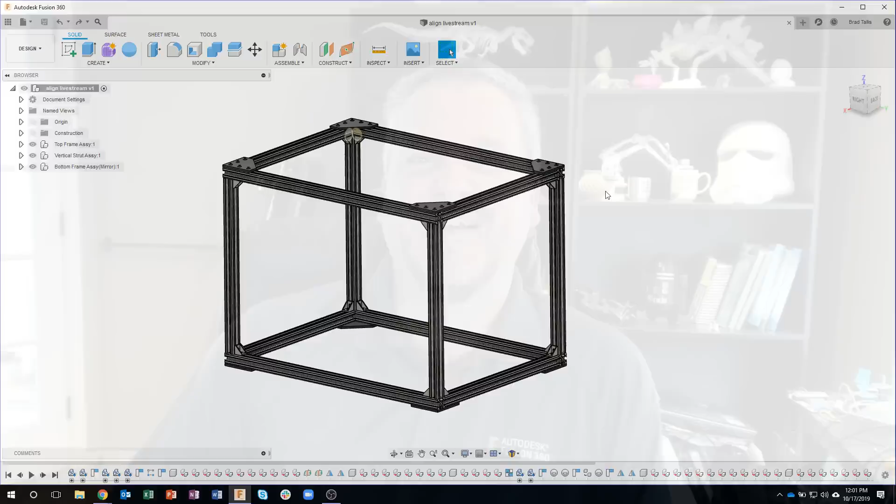Good news, my buddy Aaron is officially back. He's been gone about six weeks, so Aaron is on the keyboard today. Everybody make sure you say hi to him, we've missed him. He was on sabbatical and moved to Toronto, Canada, so we're going to miss him in San Francisco, but he's making a new home in Toronto. Thanks for helping out, Aaron.

I can see in the chat everybody's excited. Yeah, we've missed him, I'll be honest.

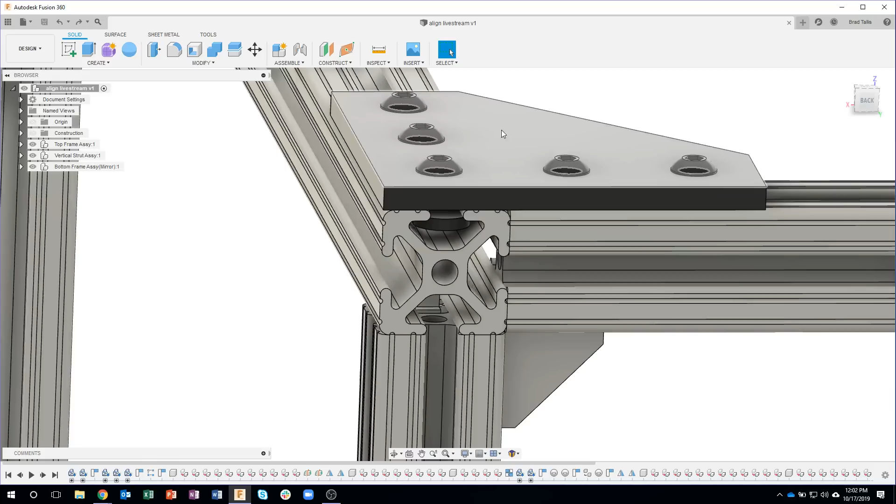What I'm going to talk about today is positioning parts in place without having to create a ton of joints. I'm going to zoom up on this corner, and you'll see we're going to learn about bringing in some 80-20 extrusions, some mounting plates. You'll notice I even have some screws in here with their specialty T-nuts that slide in. Believe it or not, there's not a single joint in this assembly, and you'll see that as we go through. So I'm going to go ahead and start a new design.

You might ask, why not use joints? Well, when we're mocking something together like this, I don't want to have to worry about specifying and capturing all those positions. I just want to mock up the design, and since this is a rigid structure with no movement going on, I really don't need all the different joint types, like revolute and slider.

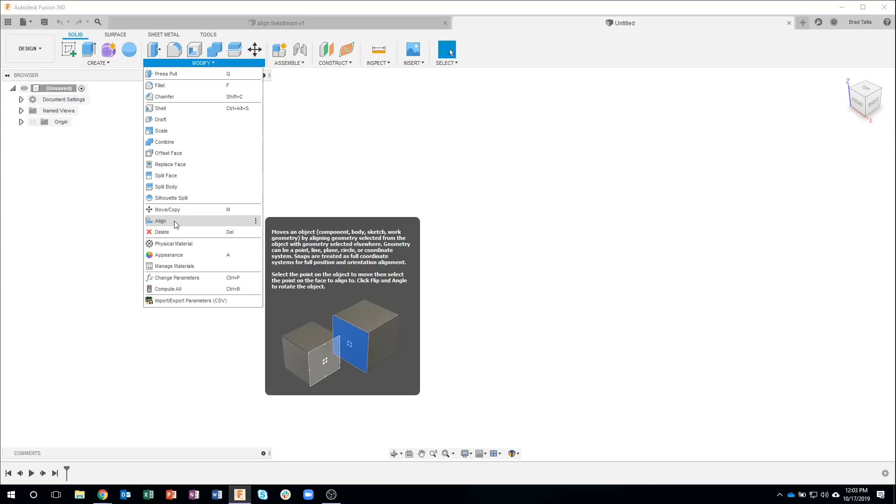So we're going to learn a new command under the Modify menu called Align, and I'm going to show the functionality of this.

We're also going to learn a couple other tricks, and a shout out to Peter. He made a funny comment on the Fusion 360 webpage saying he loves learning all these new tricks, so I appreciate that. I'm glad everybody's learning something.

I've shown this in the past where you can insert a McMaster-Carr component, but there's also another really powerful option in here called Insert a Manufacturer Part.

When I do this, it's going to bring up a web page, of course, on the wrong screen, so let me bring this over. Just a second here. Okay, I want to get back so I can see what everybody's seeing.

This brings in a manufacturer part, and you'll notice it's got a bunch of different manufacturers in here. For example, at the very top we've got 80-20. You'll see ABB in here, and you'll probably recognize some others, such as Bimba cylinders. There's a lot of electronic parts too, like Eaton has a bunch of stuff in here. Maybe you need IGUS chains, so you can click on the I over here, and here's all the different IGUS products. I'm going to show how you can insert this type of stuff right into Fusion.

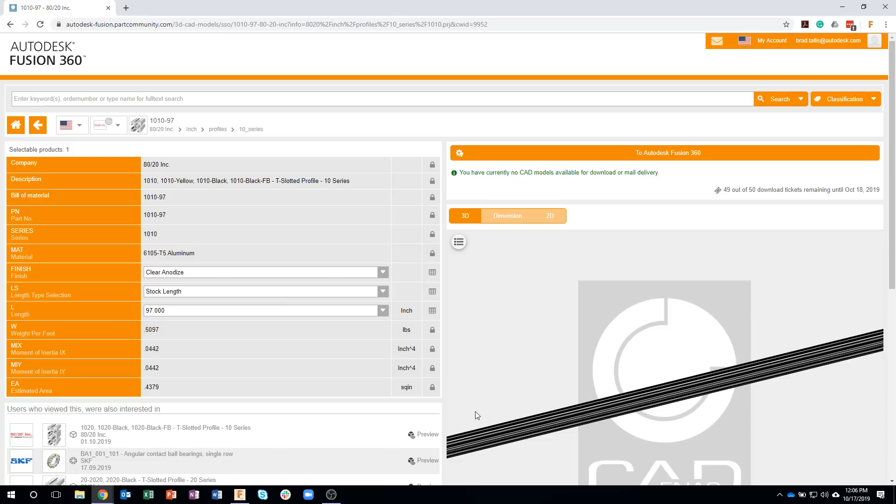And it gives you options, and it even brings up a 3D viewer. If I rotate it, you can see the end profile. This is a really long example, so that's why it looks so long, but you can see that's a 3D model of that 80/20 extrusion.

So you can verify that it's correct. It gives us all the information about it, and you'll notice it says stock length, which is 97. Well, I can come in here and say I want to do a custom length, and I can either drag or type it in. So for example, let's just do a custom length of 24.

Now you'll notice it says you've changed something. If you want to update your preview, you can, and it'll update that 3D preview, but you'll notice it'll be much shorter, a better representation of the actual part. So I really like this built-in 3D preview, so I can verify that looks pretty good.

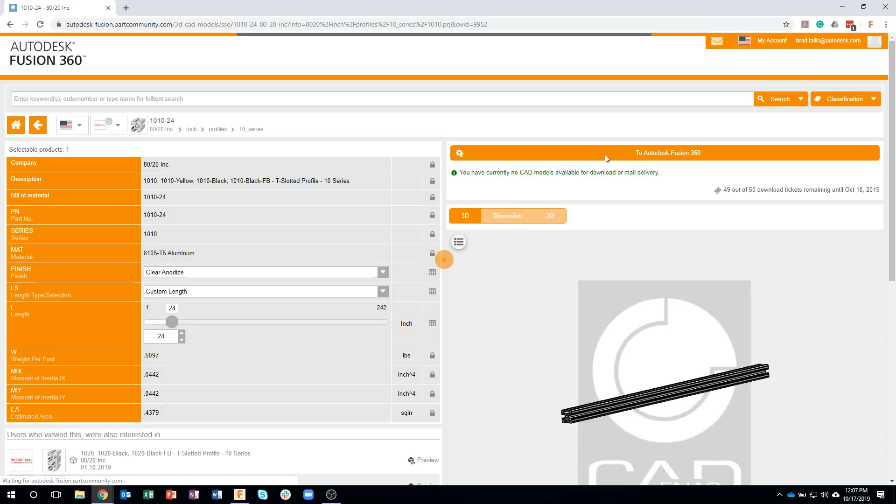Then you'll notice right here, to Autodesk Fusion 360. So I just click on that button, and it's going to bring up this dialog that says open this application. Go ahead and say open. And let's confirm that that's going to work. It's because I have these multiple screens. Yeah, there it goes, I'm going to have to bring up Fusion.

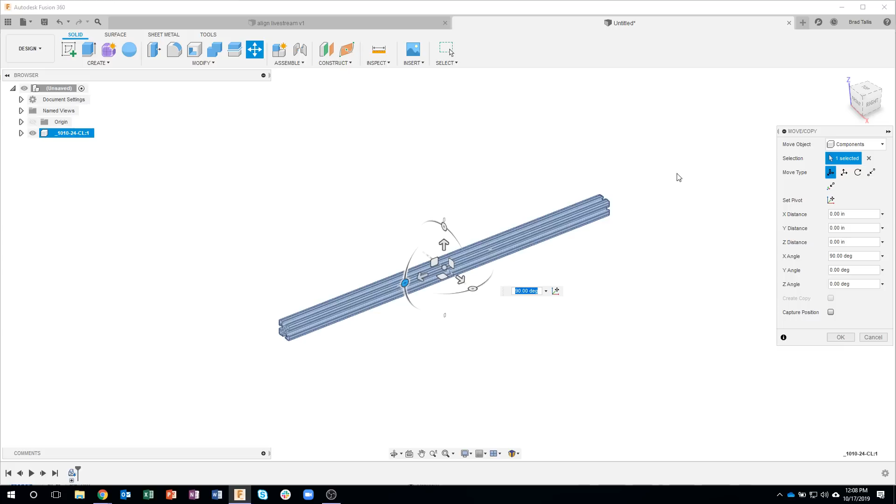And here you can see there is that 3D model from 80/20. Now it's pointing up and down. I want it to lay horizontal, so I'm just going to grab this little button and drag that down until I see 90 degrees. So now it's laying flat in the top orientation, which is what I want. And I'll say okay. Okay, so that's how simple it is.

I did not have to draw the profile and extrude or anything like that, and this is just like any other Fusion file. So for example, I could click on this face, say press pull, and I could move and change the length of this part if I needed to. So by default, I brought in a 24-inch part, but I could come in and make changes to it, just like it was created inside of Fusion.

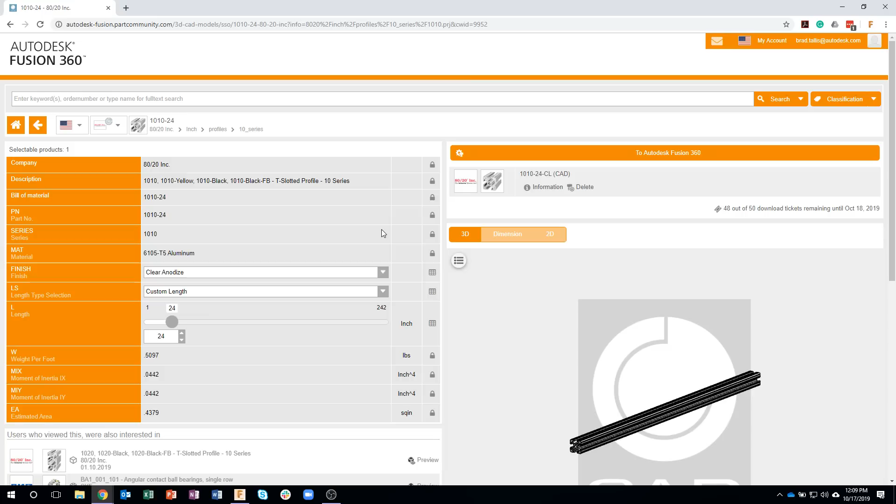Okay, so I'm going to do this a couple times to bring in some other parts. Let me jump back to that page. And now I want a custom length. Let's just do a custom length of 16 in this case. I'll say to Autodesk Fusion 360. Click on that open launcher, and I'll just jump over to Fusion, and you'll see it come into Fusion and add it into our current design.

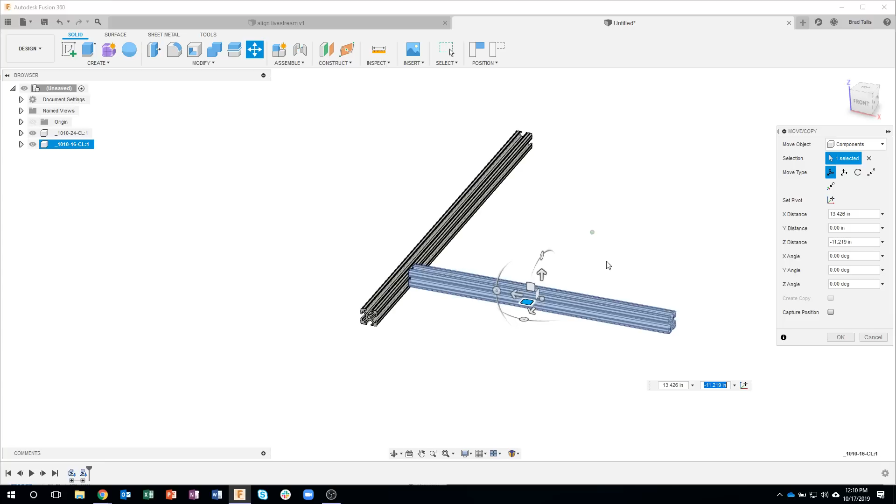So there it is. Okay, so I'm going to go ahead and rotate this a little bit, and I'm going to rotate it this direction. And maybe I'm just going to get it close to where it needs to go. Okay, so you can kind of see it's sort of floating in space right now, and I'm going to leave it where it is. I'm just going to go ahead and say OK.

And notice my browser, I'm going to make this a little bit smaller. So here's the two different parts, there's the 24-inch part and there's the 16-inch part. In fact, I'm going to move the 24-inch part over just a little bit so it's not in the default location, because that's going to make things more observable in the near future. Otherwise things would come in perfectly, and I want to show that it doesn't come in perfectly every single time, and we might need to reposition or whatever. Okay, so I've got my two parts.

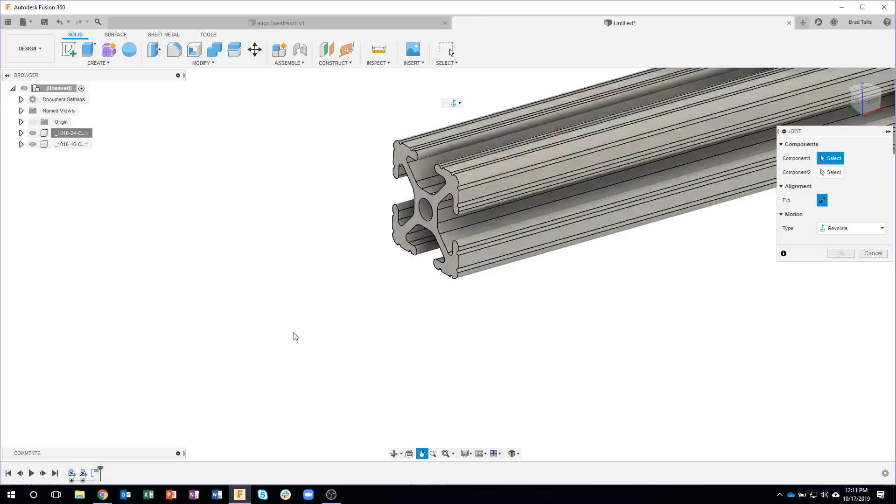Now I want to line these up, and you might say okay, we'll go ahead and use the joint command. So I'm going to say joint. Now when you do a joint command, you get all these little markers to line things up. Well, for example, I don't have a sharp corner right here, so I really can't go corner to corner. In fact, if I zoom out, you'll see over here, there's not a corner to go to. And so creating a joint isn't always the best solution.

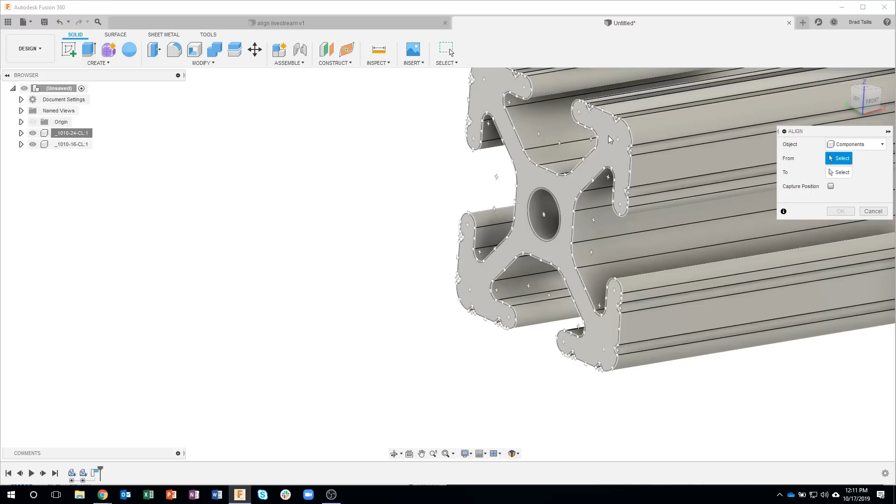So what we're going to do instead is use the align command. So I'm going to click on align, and you'll notice it allows us to align components from and to. So what I like to do is get it lined up in 3 different axes. For example, I'm just going to click on this face - I could click on these little markers, it really doesn't matter - but I'm clicking on that face because I want to align it with a face over here. So this face, I want it to butt up against this face.

So watch what happens when I click. You'll see that part slide over. And if we look at it from the side, or from the front, you'll notice that those are now lined up. So it aligned that face with this face down here.

Now I'm still in my align command, and this is what I think is so cool. I don't have to do 3 separate align commands. I'm just still in the align command.

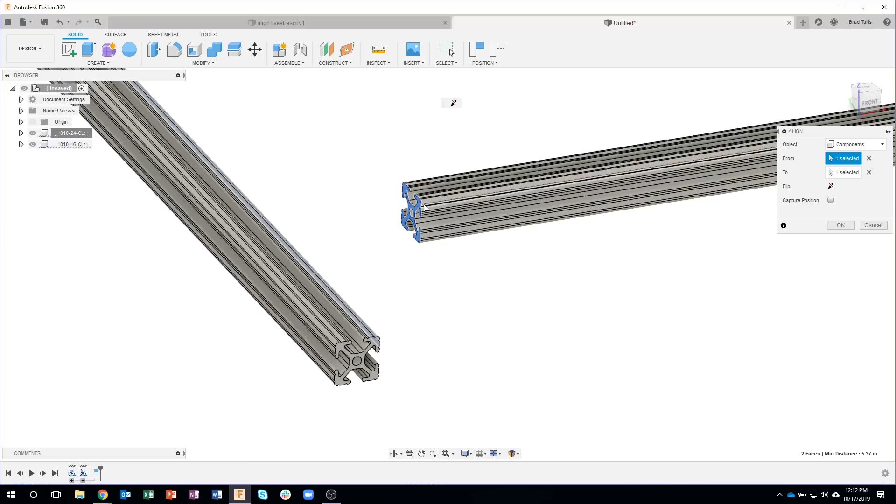Maybe I'll say I want that face to align with this face right here, and you'll see it snap down. So sure enough, if we look at it from the front, we can see that we're aligned against that face and we're aligned against the top.

And so really the last thing we need to do is say, okay, let's align that face with this face over here. And you can see how it slides that part into the correct location.

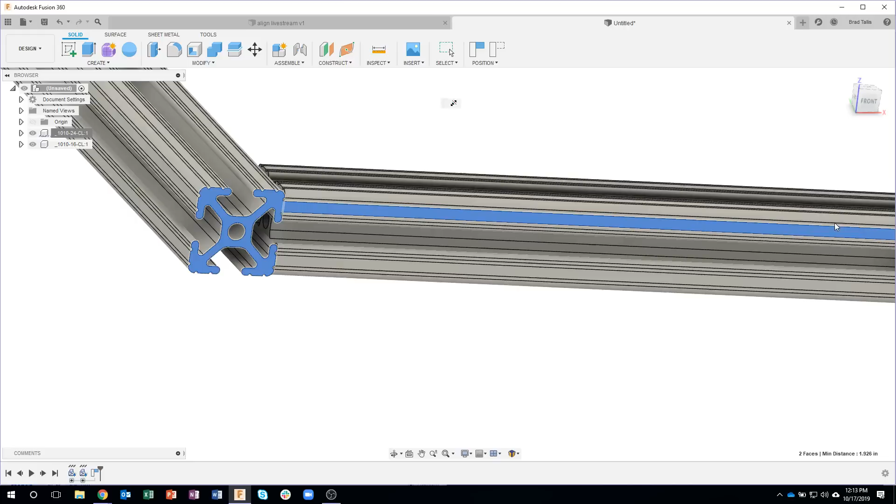And I'll go ahead and say okay. And there it is. Now you can really visually see that sure enough we weren't able to line up any corners or anything like that with a joint command. It would have been pretty difficult. I mean, it's doable, but I really like the align command. I think it's so much faster.

Okay, so now I got these 2 parts where they need to be, but I want to join them together. So let's go back out to that page. And I'm just going to back up a couple steps.

And I'm going to go into the joining plates. So I'll click on joining plates. And you can see all of the different manufacturer joining plates. I can't emphasize how cool this page is. I mean, I use McMaster-Carr all the time, but this is so powerful with all of the different manufacturers out there. Okay, so it looks like this guy right here.

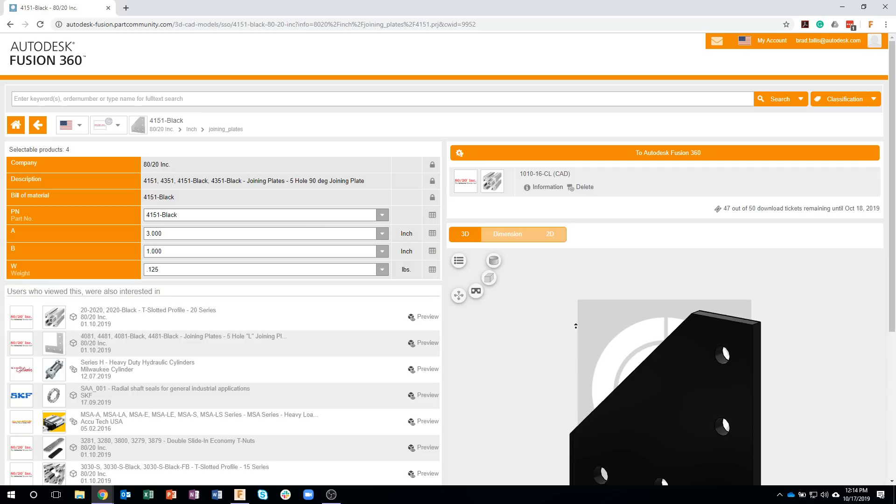I'll use this one. Gives me, again, some options, tells me what the dimensions are, gives me a preview what that's going to look like in my browser here and all that kind of stuff. Looks good. Even tells me what other people that were interested in this part.

It's kind of cool. I'll say to Autodesk Fusion 360. Again, I could have sketched this, I could have drawn it, but that would have taken quite some time. So why not just bring in the manufacturer's part?

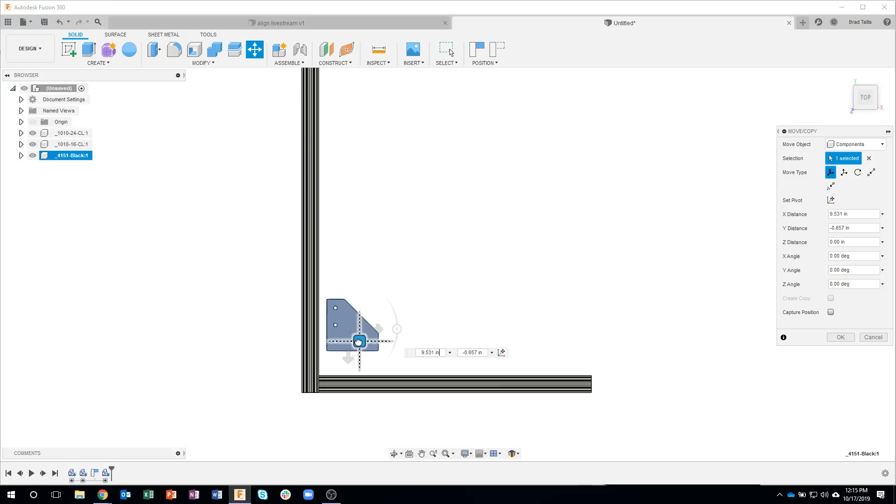Now it's pointing the wrong direction, so I'm going to go ahead and rotate. Let's just go 90 degrees that way. And I like to get it fairly close. So I usually look down at the top view, kind of position it where it sort of needs to be, and then I'll kind of zoom or rotate, kind of to the front view and just bring it down. Oops, a little bit too far. Something like that. I'll go ahead and say okay.

And now it's kind of floating out in space, but it's fairly close where it needs to go. Okay, so let's use the align command. So I'll say align from. I like to get it where it needs to go first. So let's just say maybe that face is going to sit on that face there.

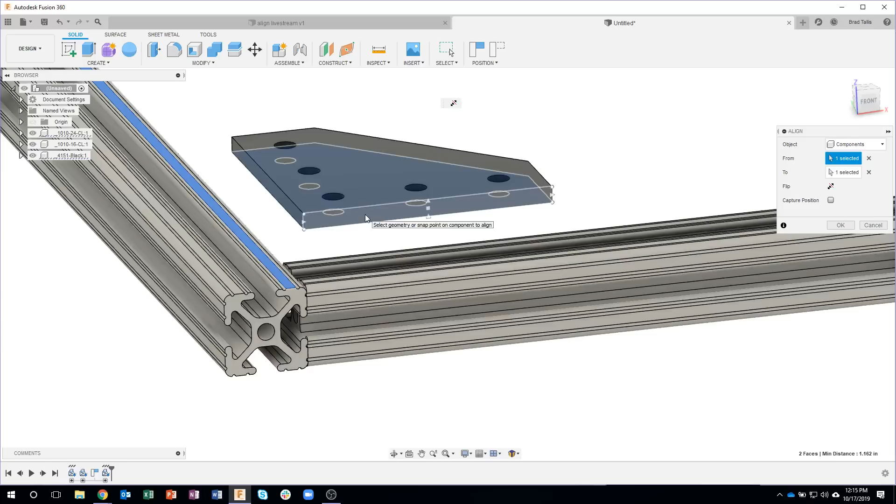You see it kind of slide down a little bit. Then I could say that face and that face there, and you see it slide toward me. And then finally, that face and this face over here. And it slides into place.

Notice I'm not having to grab any of these tick marks or anything like that. I'm just basically grabbing faces. I'm saying align that face there with this face here, for example. It's very, very quick. I'll say okay, and it's now in the correct position.

Hopefully this is making sense. It looks like Aaron is actively answering questions.

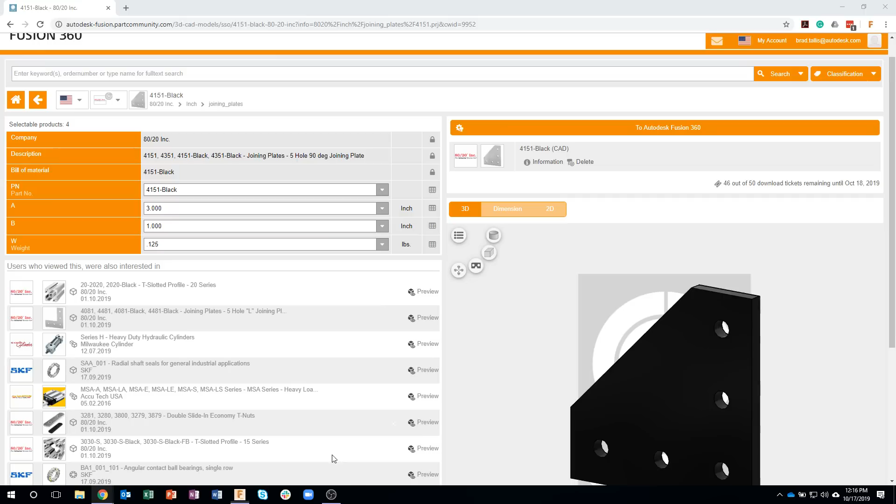So, okay, now let's bring in some hardware. Again, don't need to draw it. Let's just go out here. I'll back up a couple steps and say fastening options.

Sometimes you can do a search, and I think it's 3042. Let me just do a quick search for that. It's from my notes when I was doing this earlier. So if you know, you can see all the different product numbers, and sure enough, there's 3042. It's this socket head cap screw. I'm sorry, not a socket head cap screw, but just kind of a button head cap screw, it looks like. So I can rotate it around, see what that looks like.

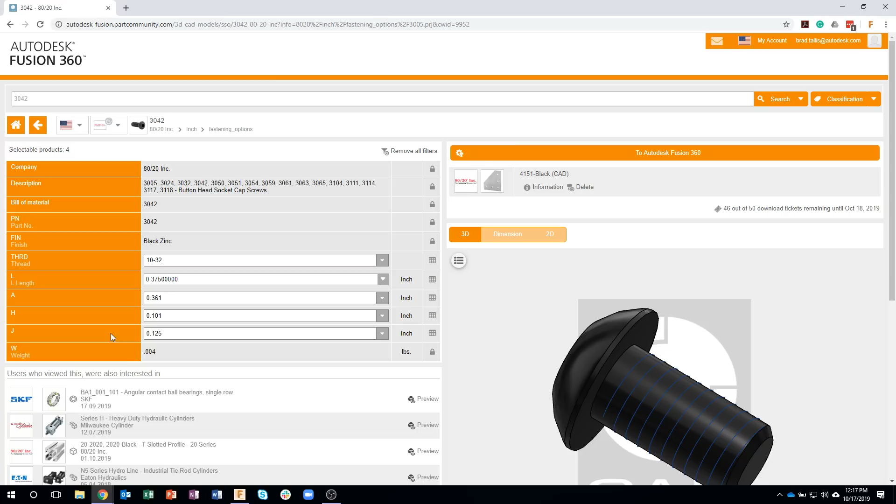I can specify the different threads in here if I need to. It's really cool, the different lengths. I'm just going to use the default one and say to Fusion 360.

It'll switch over to Fusion.

I like to get it sort of close, so I go from the top. I'll just kind of drag that over and bring this down a little bit. The only reason I do that is because I can zoom up on this area and see that, sure enough, the screw is pointing in the wrong direction. So I like to get it oriented first.

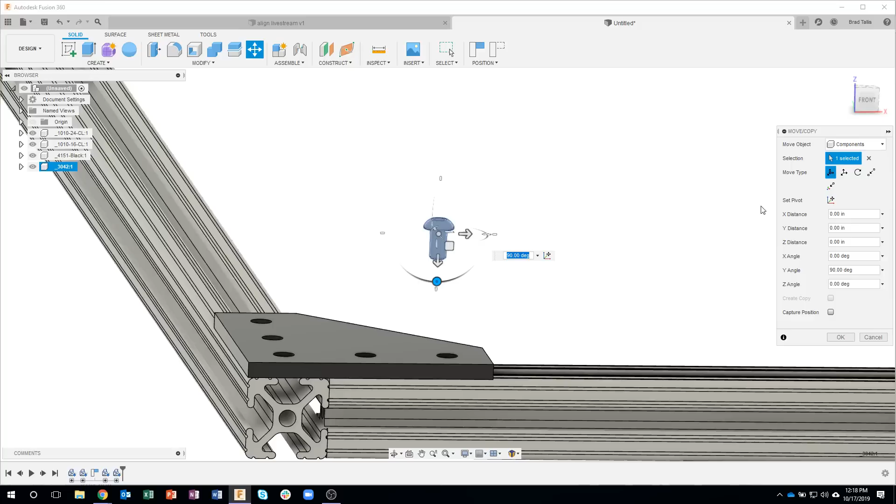So I'll say 90 degrees. Now I could use the align command, but you'll notice I'm in this move command right now. It's allowing me to move it around, and by default it's allowing me to do a free move where I can just kind of move it around.

But there's one in here called point to point. So I'm going to say point to point, and let's look at the bottom of the head here. You can see I can grab this edge, and it's a little hard to see, but there's a point right in the middle, right there. So if I just click on this edge, it's going to grab that point. Oops, that's my origin point.

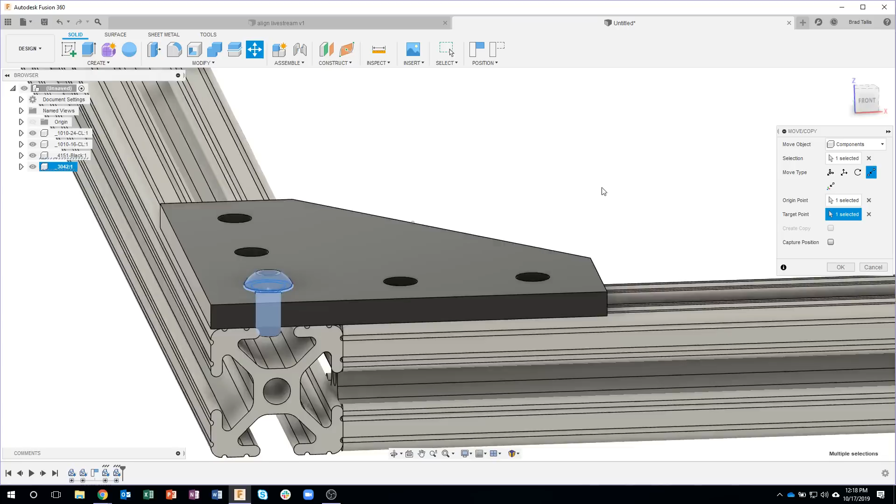And then the same thing over here. I'm just going to get near this circle and click, and it's going to move that screw from where it was to that new location. And because I picked this bottom edge of the screw head, it lined it up with the surface of the plate, and it's perfectly lined up in the circle. Let me go ahead and say okay. So it's kind of like a free move that we got. Didn't cost us anything.

Now, I think I see some people asking questions about, is align just like doing joints and stuff? No. In fact, if I grab this plate or this screw, I can move them out of location. There is no constraints or joints or anything like that being created as we're doing this. That's an excellent question. Oops.

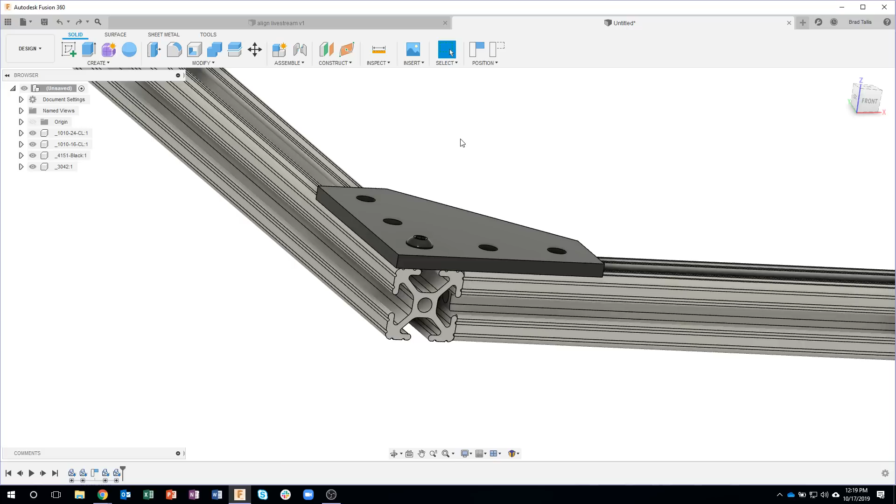Let me undo back. So it's just basically getting them in the correct location, but there is nothing defining that these are constrained or jointed together. But we're going to get to that here in just a moment. We're going to learn some tips and tricks with that also.

Okay, so we can kind of see that sure enough that's coming down through, and maybe I want to create a drawing of this or an exploded view later, so I want to actually show how this thing is going to get assembled. So I'm going to bring in one of their special T-nuts, I guess they're called.

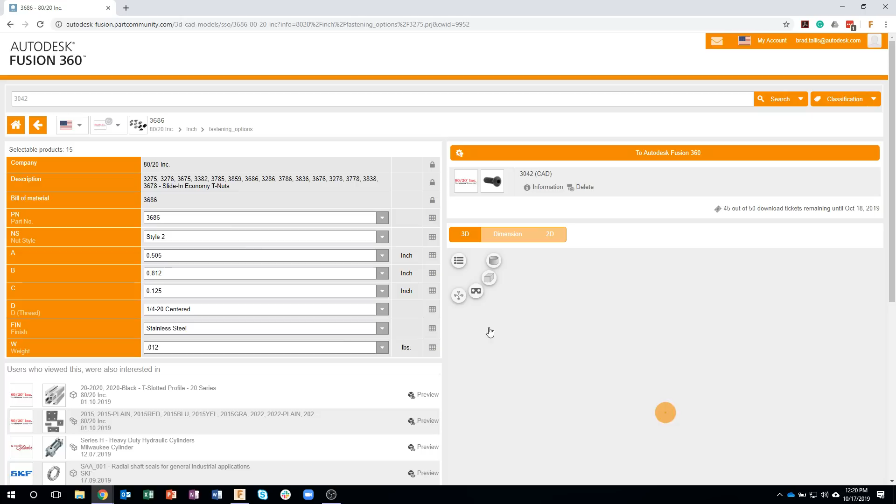So let me back up a little bit, and I'll go to the fastener. Let's do this guy, and you'll see the different kinds that they have. So it basically looks like a special nut that can slide through.

Now I do know that the thread that I brought in was a 10-32, so I'm going to come in here and change this to 10-32, and it'll update, give me the correct part number, etc. I'll say that's good. Let's go to Fusion.

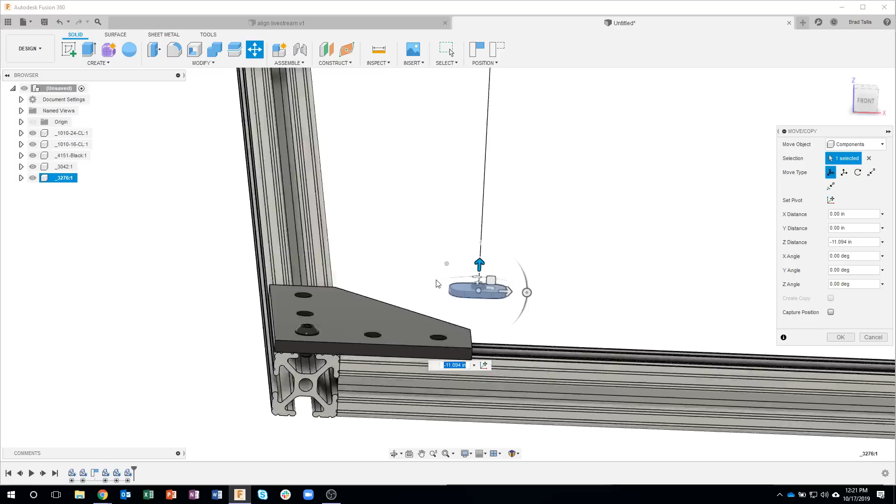Well, I know I kind of need to rotate it. Let's just go 90 degrees in that direction. And once again, I'll use the, actually I won't use the point to point, because we're going to see an issue that we're going to run into here if I were to use point to point.

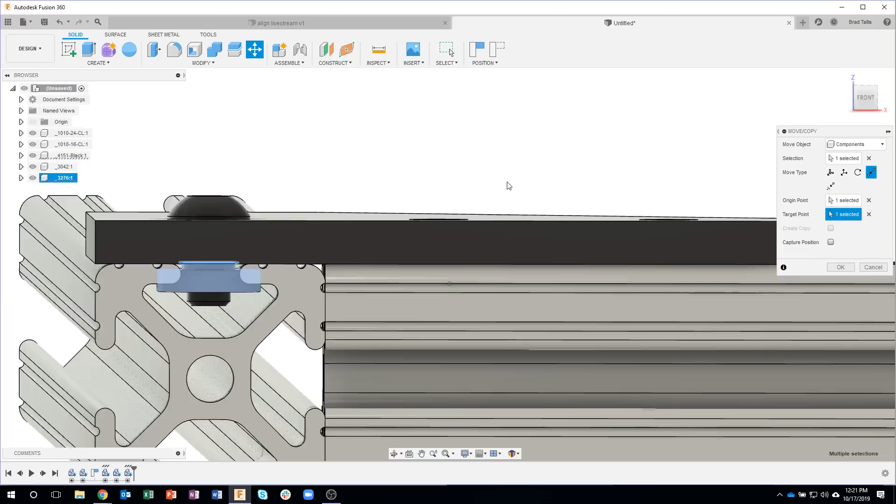So in fact, I'll show you, I'll make a mistake here. So I'll say point to point. I'll grab that top edge, but then I need to select a circular edge here. And if I were to grab that edge there, you're going to see that it's going to sink my washer into our extrusion, which obviously we don't want to do.

Okay, so I'm just going to go ahead and leave it right where it is, and we'll use the align command to help us out. Because remember, with the align command, I can do multiple aligns. So let's do align, and I'm going to do the exact same thing.

I'm going to select that top edge right there, and I'll select that top edge right there. And you can see that it aligned it where it needed to go. But let's go ahead and turn off that plate.

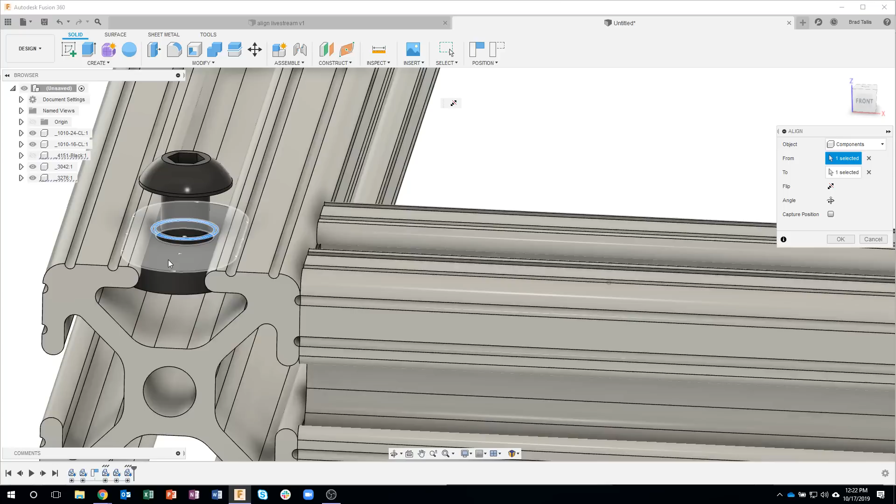Now I'm going to align that face with this face, and you'll see it drop down. We're perfectly lined up axially through the center of the screw, and now it's touching the extrusion where it needs to be. So I'll go ahead and say OK.

So again, you can see that's why I really like this align command. Okay, well, what about these other holes? Well, let's let Fusion do the hard work. Okay, I'm going to create a pattern.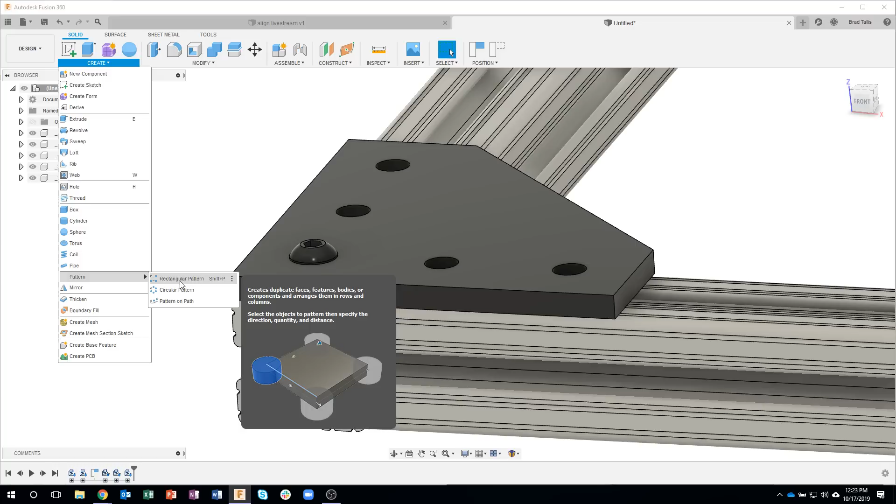Now, I could do a pattern on a path, but in this case I'm actually going to do a rectangular pattern because it's kind of a rectangular part. So I'm going to say rectangular pattern.

Now, every once in a while, you'll get these warnings that say some components have been moved. Do you want to capture the current position, or continue in the previous? Well, I kind of like where it is right now, so I'm going to capture the current position. It'll tag in my timeline that the screw and washer were positioned where they need to be.

Okay, so now I'm in my pattern command. What are the objects? I want to make sure I'm patterning components, not default faces, because everything we're doing right now are components. So now I can say I want to pattern the screw and the nut at the same time.

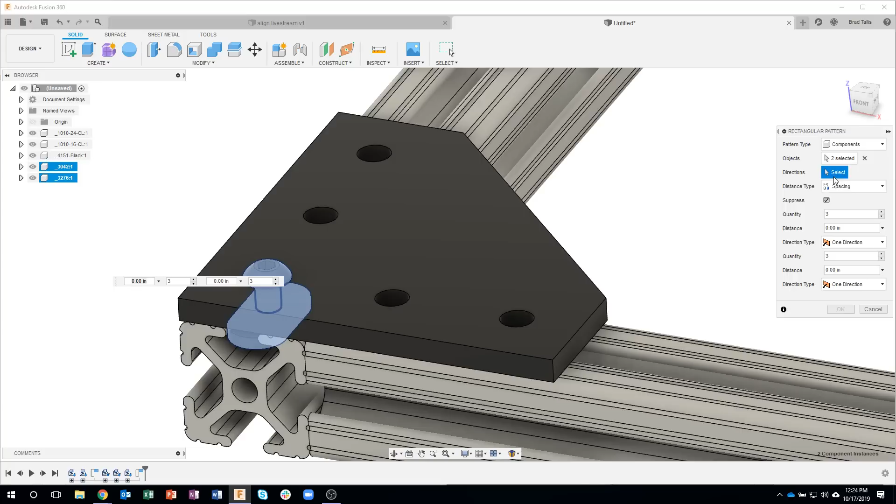Okay, what's the direction? Let's just go ahead and click a linear direction. And when I start to drag, we can see a preview, and I'll move even further so you can see what's going on there.

We have a distance of spacing or extent. Well, I know the spacing of these holes is 1 inch, just because I've done this before, but I could have measured between those holes. To save time, it's 1 inch. And sure enough, you can see it positioned those where they need to be.

Well, I also want to pattern in this direction, but notice I'm getting way too many—that's okay, we'll fix that in just a moment. So I know this distance for the spacing is 1 inch also.

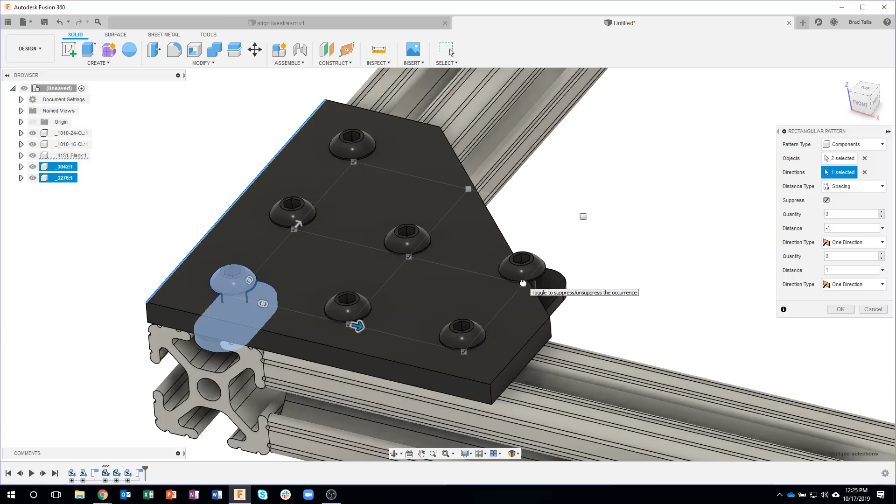Then notice this little suppress checkbox. What that means is every single one of these instances has a checkbox, and I can just click on them and turn off the instances I don't need. So I'm going to click those 4 that I don't need, say OK, and I've just created a rectangular pattern. We can see it did the screws and the nuts.

However, if we look over here, we can see that the nut is pointing in the wrong direction. So we need to rotate that around. Okay, easy fix.

Now here's a neat little tip. If you just hover over something in your timeline, you can see how it highlights it in your browser. So I can see that 3276 and 3276 are the 2 nuts that I need to rotate.

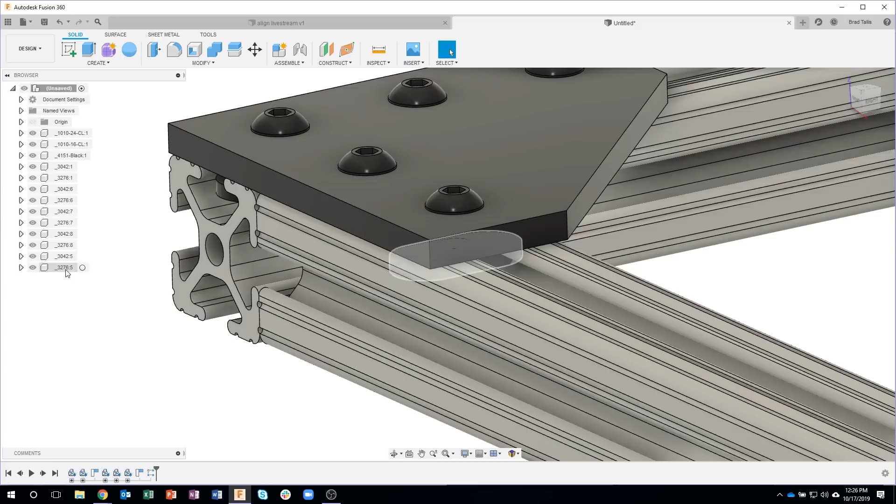So I'm going to click on it and say move. My origin is right in the center of that, so I don't even have to do anything except grab this guy and rotate it 90 degrees. And boom, we're done with that guy.

And then the same thing with this one. Right click, say move, and we'll rotate. Oops, make sure I grab the right thing there—sorry, I'll do that again. I'll right click and say move, rotate 90 degrees, and say OK.

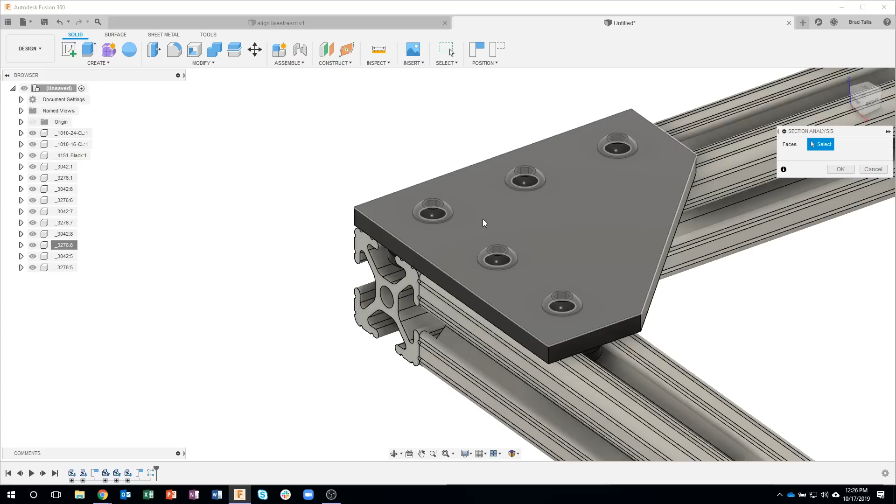And if I were to do a section analysis now and slice through this, we can verify that the nuts are pointing in the correct direction, and everything's centered and everything looks really, really cool.

Okay, now that was with me talking. Think about how fast we've created basically this corner of our enclosure here. We've got the mounting plate, we've got the screws, we've got the nuts in location and everything.

Now, obviously I want to reuse this whole assembly, but I don't have it as an assembly right now. These are all individual components in my timeline. So what I'm going to do now is start organizing.

So I'm going to create a new component, and I think the easiest way to do that is right click at the top level, and you can see it says new component. That's exactly the same as coming up to the assemble menu and saying new component. But I'm going to say new component, and you'll see, sure enough, there it is.

And I can rename it—I highly recommend you rename your parts and components because it makes things easier to find and deal with later. So I want to create a sub-assembly of this corner plate.

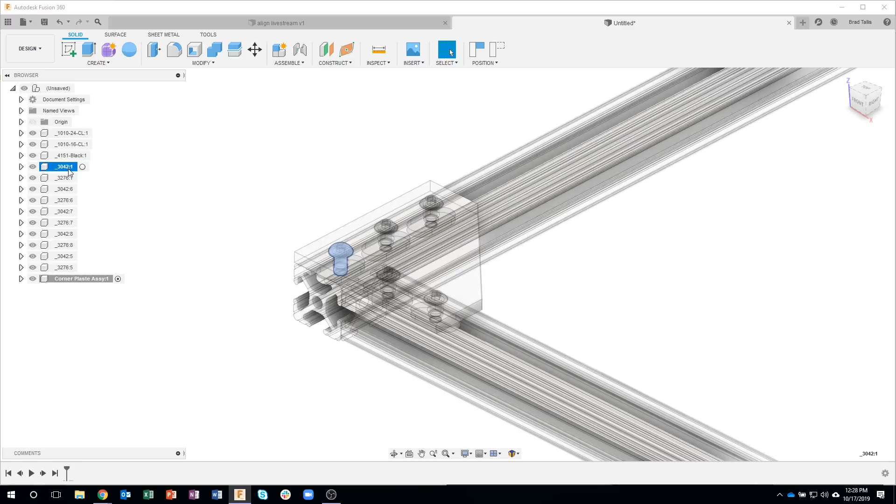So I'm going to just call this corner plate assembly. And then I'm just going to grab all of the parts that have to do with this corner plate assembly—there's the big black part there and all of the screws and nuts. So I'll highlight all of those and drag and drop it onto my corner plate assembly.

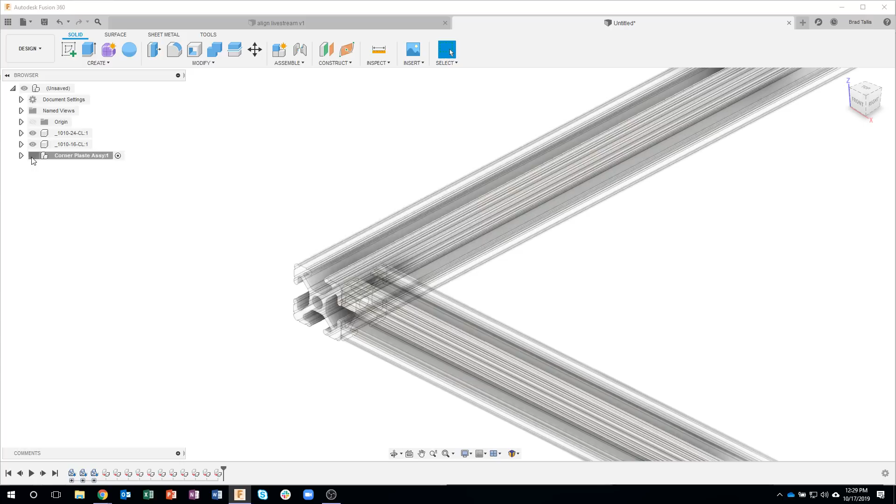Now, like I said, you might see this pop up. I'm going to go ahead and capture the position, but notice what happened—it put all of those components underneath this corner plate assembly. And if I toggle the visibility on or off, we can see that that's almost like a sub-assembly. It makes it really easy to kind of figure things out.

Okay, let me go ahead and activate my top level again. Now I want to start mirroring some things around since I don't want to have to keep reinserting—I already got what I want. So I want to mirror this onto the other side over here. Well, to do a mirror, we need to have a plane or an edge or something that we can mirror along, and I don't have that here.

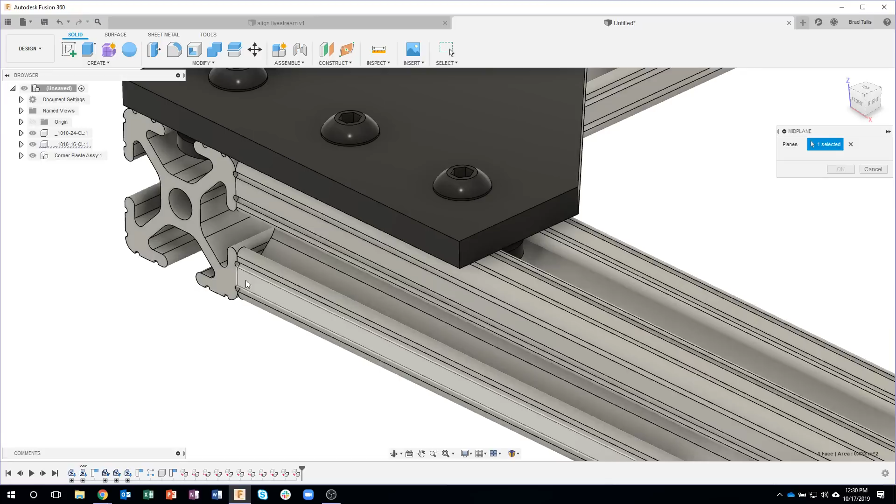So I'm going to create a construction plane. One of my favorites is this mid-plane construction plane, so I'll go ahead and select that. And I'll come over here and grab that face there. Then, depending on where you move, you can kind of see how it's highlighting that face—I'll go ahead and click that face there. And what it did is it basically sliced it in half, and it put this plane exactly in the middle of those two faces.

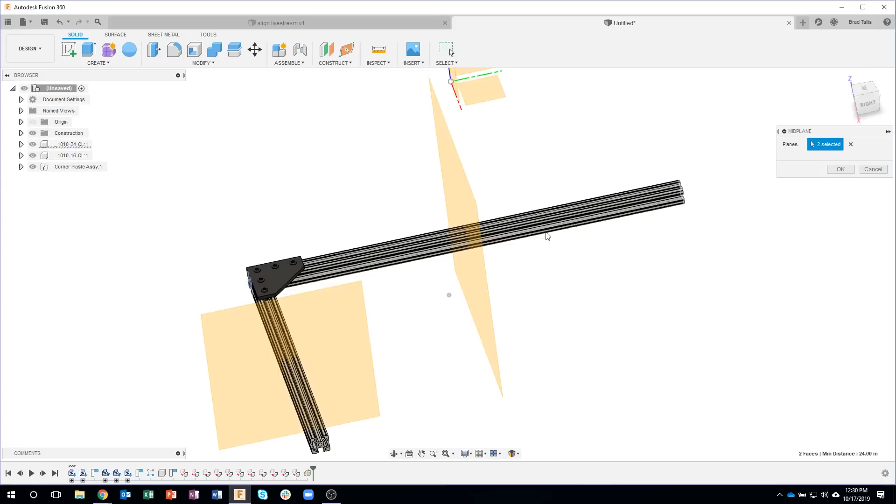And I'll do the exact same thing because I'm probably going to mirror in the length direction also, so I'll do a mid plane. Let's just grab this end face like so, and I'll rotate so we can kind of see, and grab that face there. I now have a construction plane that slices right through the center of that long arm. Okay, I hope this is all making sense.

Okay, so now that I have what I want with these construction planes, let's start using the mirror command. I'll come in here and say create mirror—again, I want to make sure that components is selected, because sometimes by default faces is selected. So just verify that we want to mirror some components. And I want to select the corner plate and this arm right here. What's my mirror plane? It's going to be this plane right here. And you can see how that brings that across. I'll go ahead and say OK.

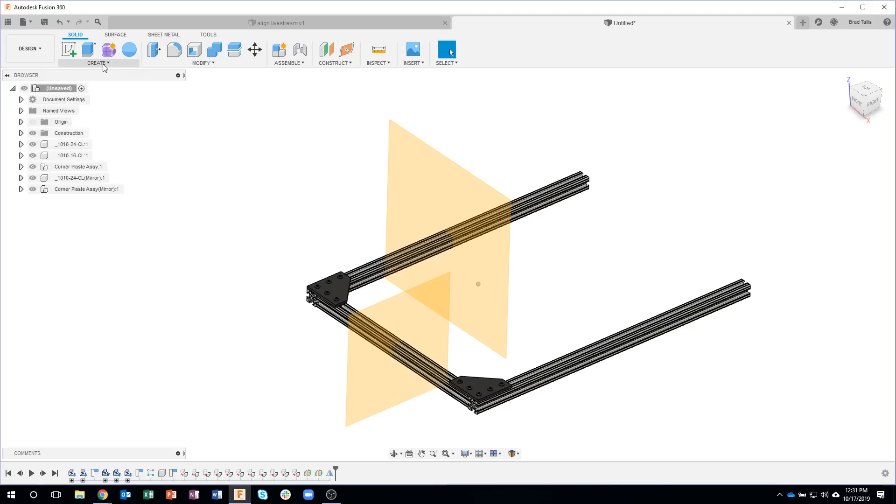That was fast, and again everything is where it needs to be—we haven't done any joints or anything like that. Let's do that again, let's go ahead and say mirror, components. I'll do the 2 corner plate assemblies now, and then this 16-inch piece. What's my mirror plane? That guy. And I'll say OK. And there is our top frame, basically, of our enclosure. So we let Fusion do the hard work.

Okay, like I mentioned before, I like to keep things organized, and you'll see here when I jump back that we've got a lot of parts in our structure browser. So now we're going to organize that and make things a little bit easier to deal with, because you'll see some of these say mirror and mirror, mirror, all that kind of stuff. So I'm going to turn off my construction, and let's create a component, new component, and let's just call this top frame assembly.

Okay, and then I can move all of these components. So I'm going to shift select all of them, and drag that into this top frame assembly. Notice my browser looks nice and clean. If I were to expand this open, we can see we've got these parts in here.

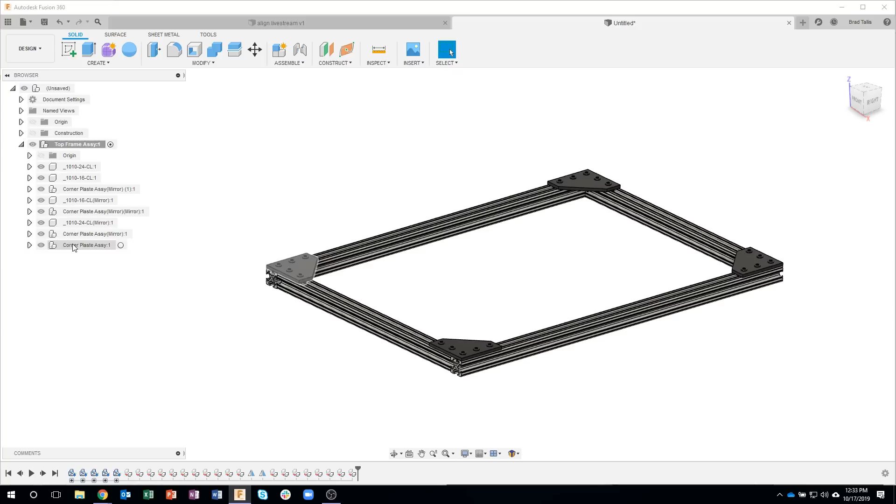Well, now maybe I want to organize even a little bit better. So check this out—at my top frame assembly, I'll right mouse click and say new component. This is why I like to use the right mouse click, because it's going to create a new component underneath that level right there. And I'm just going to call this corner plates assembly. I'll select these 4 corner plates, drag those into my corner plates assembly, and now I'm just left with the 4 extrusion pieces, the 80-20 extrusions, and my corner plate assemblies.

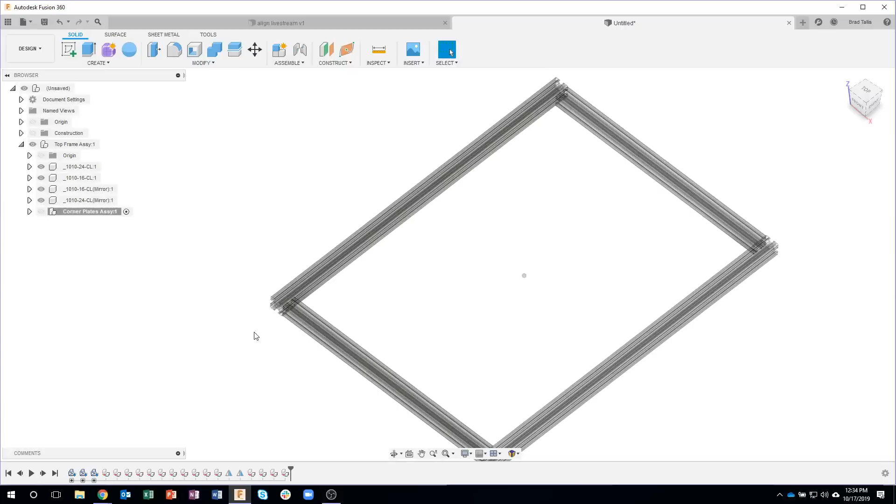And what's neat about this is, for example, I could turn off those corner plates, and now we're just looking at the extrusions. It just makes things so much easier when you organize them like this to kind of keep things simple.

Okay, like I showed before, we haven't created any joints, so everything is separate. Now, obviously, we're kind of screwing this thing together. We want it to be one kind of solid thing. So I'm going to use this rigid group command.

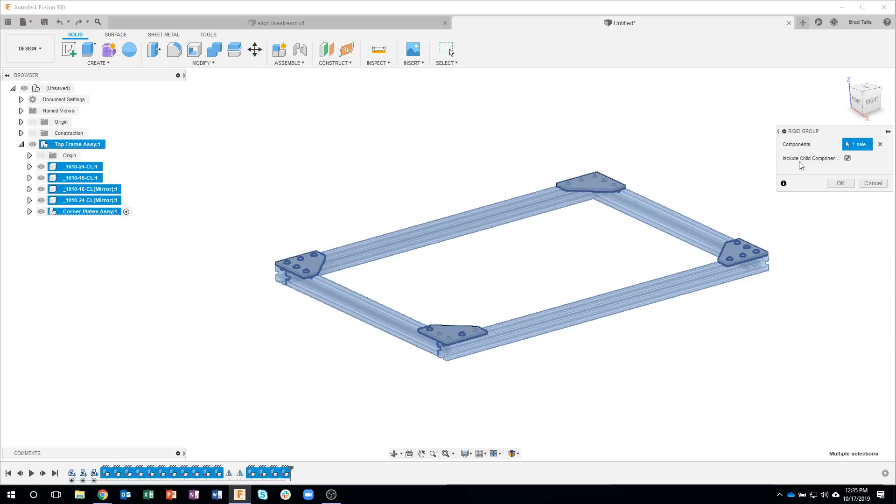So I'm going to go ahead and say rigid group. And what are the components? I'm going to just select that whole top frame assembly. Notice it says include child components, so it's going to grab that and everything underneath it, no matter what level it's at. So I'll go ahead and say OK.

And this is now a rigid group. If I grab on any of it, it moves around like it's assembled together. This is what I was talking about earlier, where we don't have to use joints over and over and over again. We positioned it the way we wanted using the align command, and then we came in and said, let's make this a rigid group.

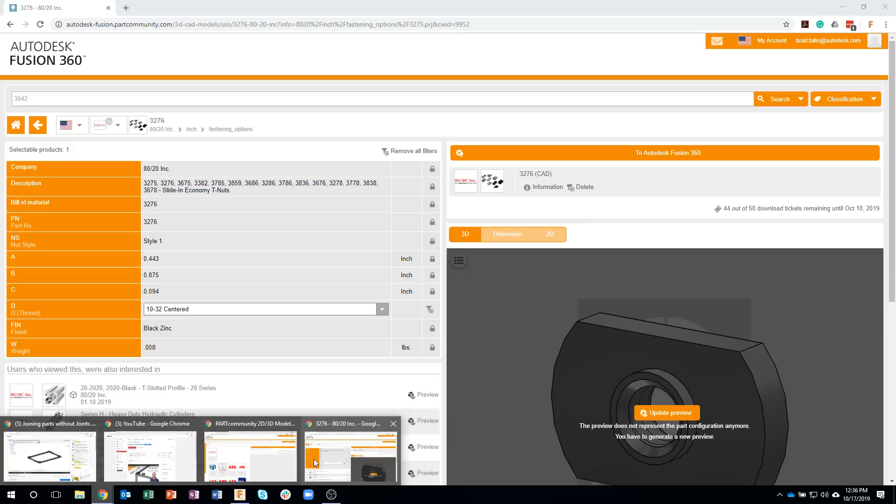Okay, so now I'll bring back that web page. I'll back up a little bit. We're going to bring in another profile, the 10 series profile. I'll change the stock length to a custom length, and let's just do maybe 16 in this case. We'll make it a little bit smaller.

So here's a little tip. You'll notice I've been dragging this slider. Just when I was playing around, I noticed something - it says 60. If I come in here and type in 16, this still says 60. Sometimes it brings back that 60-inch length. So I like to click somewhere else on here, and you can see how it dragged that slider for me. Now I'm confirmed that that's 16. So just a little tip there when you're using this product.

So I'll go ahead and say send to Autodesk Fusion 360, because that's the coolest tool out there. And we'll bring this in. Yeah, I saw somebody said, I need that link - it's right here, it's actually not a link, it's under the Insert menu: insert a manufacturer part. We should probably do another one just on this particular command, because there's so much stuff out there - electronic components, pneumatic cylinders, everything you can think of is under this manufacturer part.

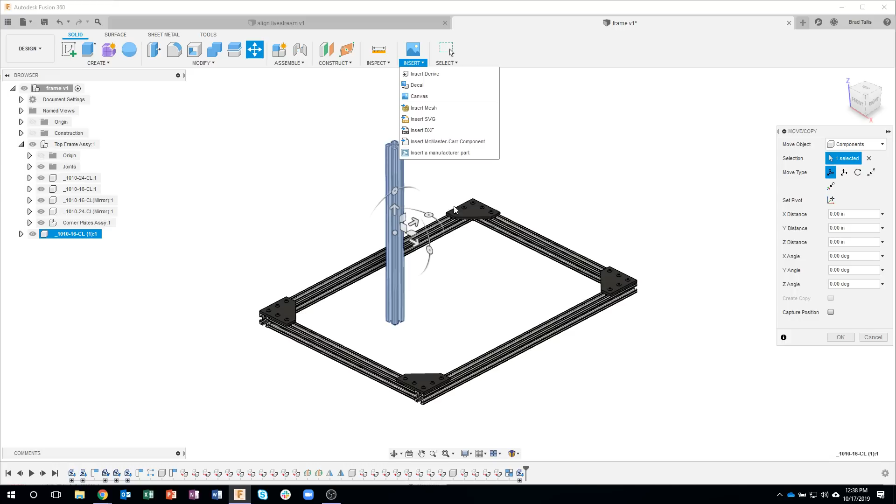It's really, really cool. Okay, now I'm going to throw us a bone here. I'm actually going to rotate this and make it come in at a really weird, wrong angle, okay? Because sometimes maybe you're bringing in something from another CAD tool, and it comes in the wrong position - something like this, for example. I just did this again to show the power of the align command.

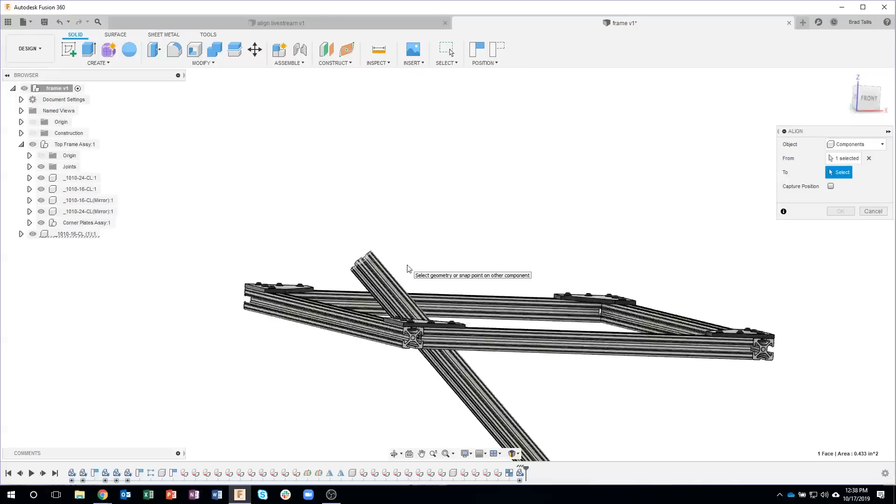So I'm going to come in here and say align. I kind of like to do the major axis first, so I'll go ahead and select on this face, and then I'll select maybe on this face right here, and you'll see that it straightened that up. Okay, now it's still angled a little bit funny, but it's pointing up and down now.

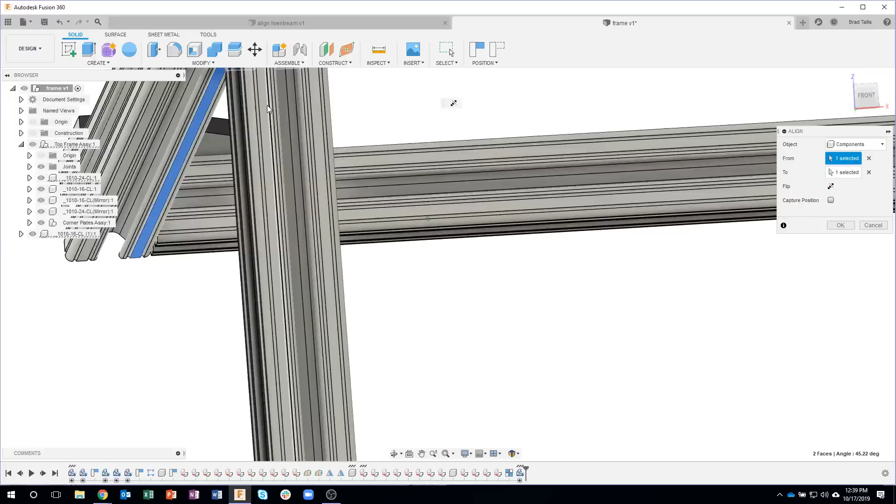So maybe I'll come in and say, okay, I want to align that face with this face here. And now you can see that that's lined up. And then finally I'll do that face and maybe that face there, and it slides it over. So even though that part came in a really weird orientation, the align command straightens everything up for us. And there we go. Okay.

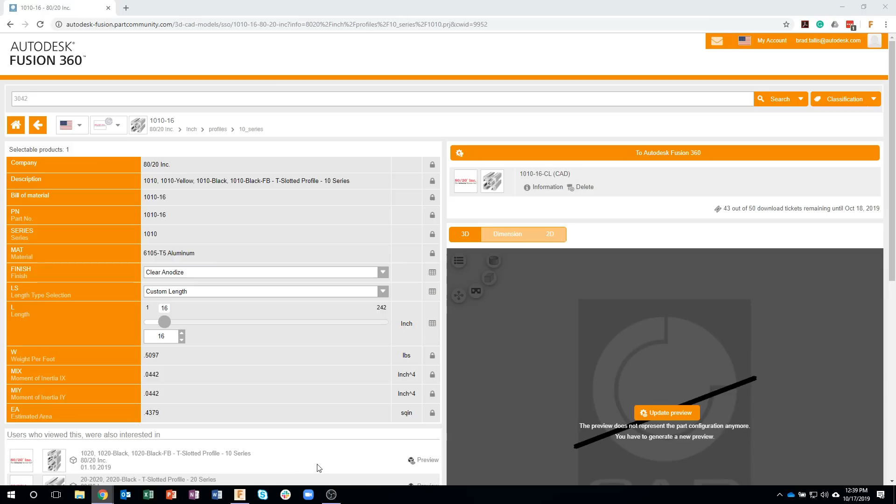Just for fun, I'll continue inserting some stuff. It's kind of repetitive, but you get the idea of just how fast we can do things here.

So I'm going to go into joining plates, and I want to do a corner bracket, maybe like this inside corner bracket. You'll notice here I'm going to bring this in, and there's going to be an issue. Let me zoom out so you can see what this looks like—it's got alignment tabs and all that kind of stuff. It's really cool. I'll go ahead and say to Fusion.

It'll bring it up. Okay. Once again, I like to get it close. So let's just go here and here, maybe over to the side just a little bit, and then I'll bring it down, kind of like so. Okay.

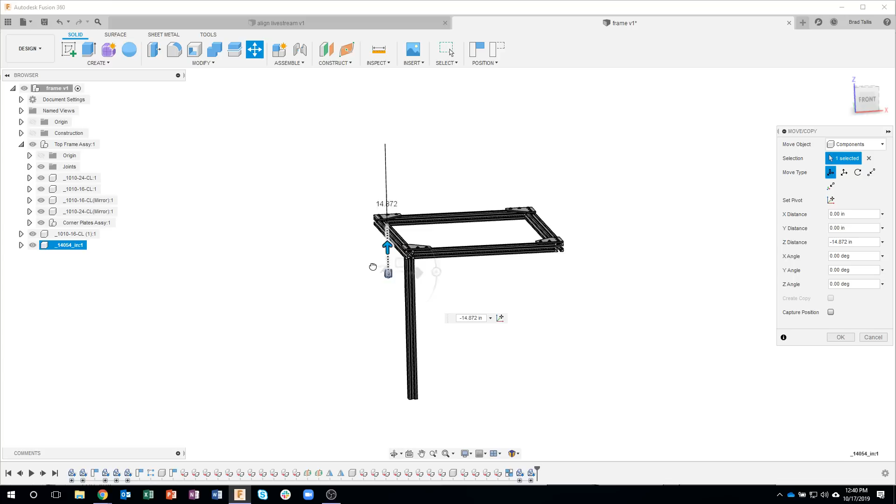Now, I clicked OK too soon. I need to rotate it. So let's go ahead and select on it. I'll say move, and I'm just going to rotate that 90 degrees like so.

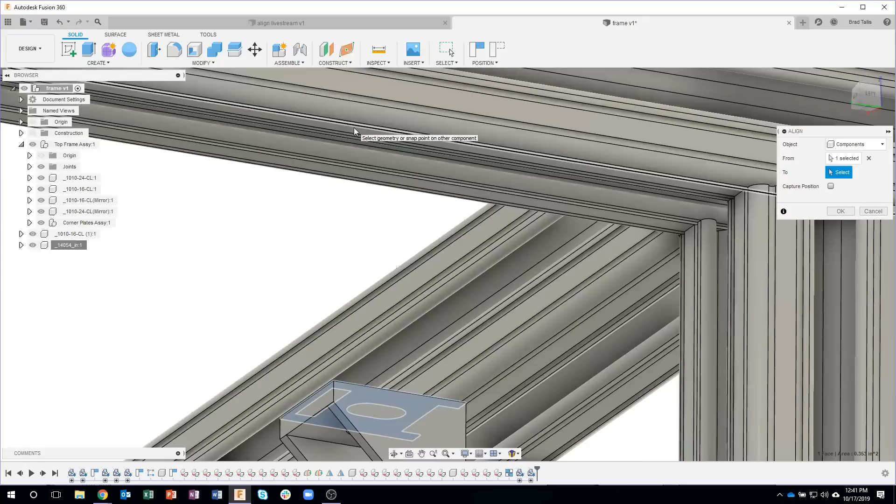Now, I've been showing the power of the align command, so let's do that again. I'll come in here and say align. Let's say that face with this face here. Then I could say, for example, that face with this face here—I'll zoom up just a little to make sure I grab the right face. And finally, I'll say that face with this face over here. And it's now in position.

But if we look at it from the side, you'll see that it's not in the correct location. That's because I originally said align this outside face with the outside face here. Well, this piece is narrower—it's not as wide as our extrusions. So here is where the align command really doesn't help us yet.

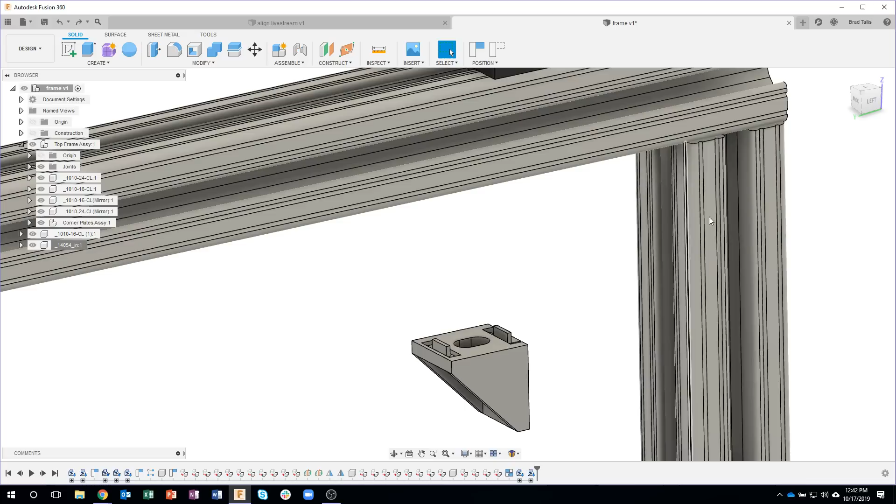I'll paraphrase that: I want to center this thing. Using the align command, we're having to go face to face, and there's no face in the middle, and there's no face in the middle here either. So I'm going to have to take an extra step, and that is creating a special joint origin. Under the Assemble menu, I'm going to say Joint Origin.

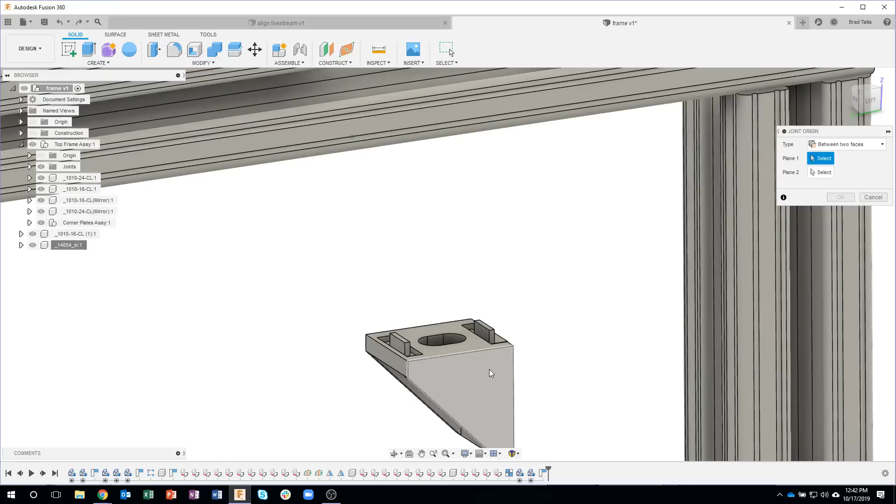And I'm going to go ahead and capture the position. Now, it says simple, but if I click this little down arrow, there's an option called Between Two Faces, and this is an extremely powerful option. So I'm going to say Between Two Faces, and I want to go between that face there and that face there. If I leave my mouse for a second, it says place joint origin on a component.

What it's basically asking for now—let me rotate around—is it's splitting that part in half. You can see that gray or tan plane. So what it's asking for now is where on that plane do you want this joint origin. I basically want it along this back corner, so I'm just going to click on that edge. And now hopefully this will make more sense. It put a joint origin in between those two faces on this edge.

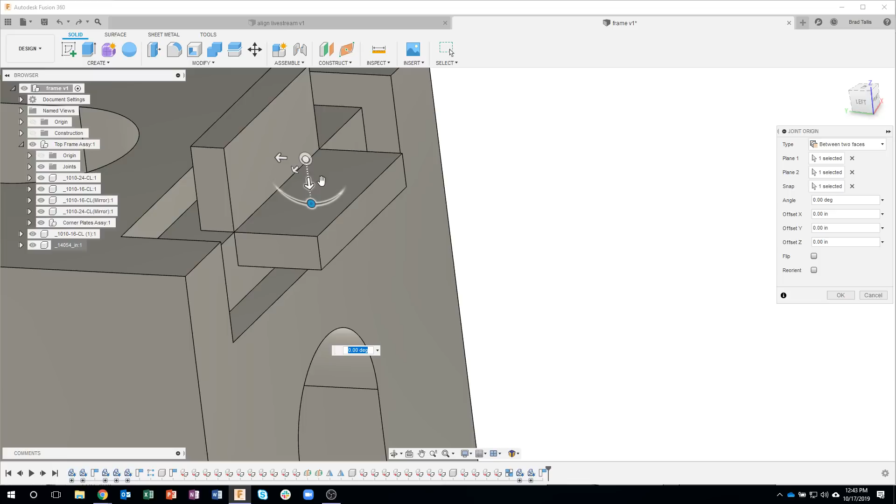You can kind of see this little coin right here—that's it, and there's a dot that covers it up, unfortunately. As soon as I say OK, it'll make more sense. Let me go ahead and say OK. And there's that joint origin, halfway between those two faces, and it's on that edge. So you can kind of see it's right on that edge.

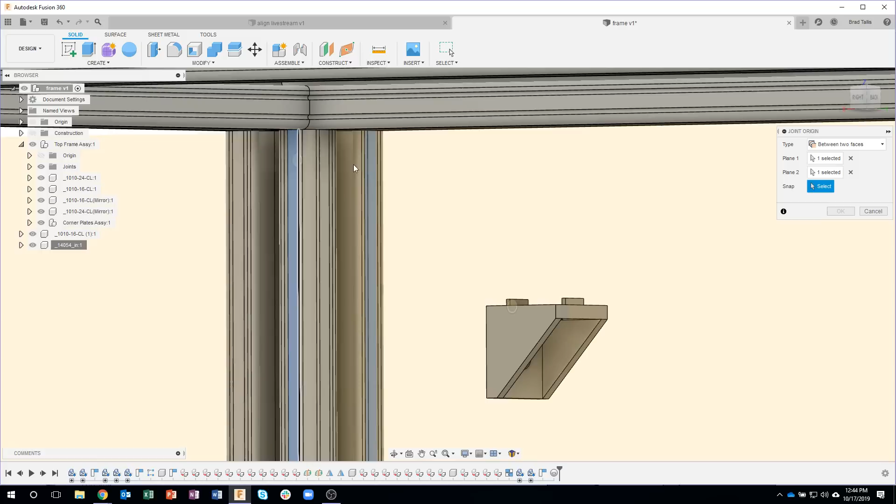Okay, so that's cool, I've got a joint origin there. I'll do the exact same thing with my extrusion over here. So I'm going to say joint origin between two faces, and I want it to go between that face there, and I'll flip around and say that face there. Just like before, it's asking where do you want that joint origin to be.

So if I hover over, for example, this line, you'll see that it's going to split that part in half by putting that plane there, and then it's putting the joint origin on that line. Now, here's the catch, and it's kind of hard to see—I saw it before. The coin, or the smiley face, some people call it, was pointing straight up and down, and I want to be pretty careful.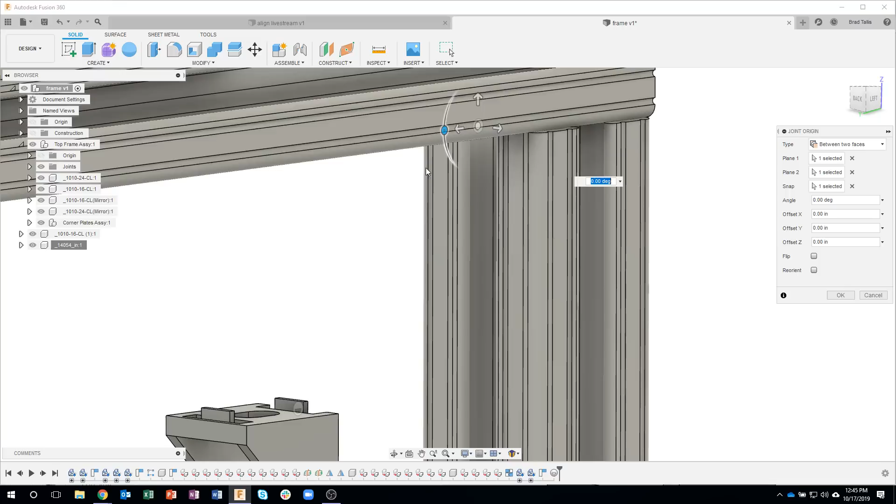I want it pointing in the same direction that this one is—you can almost think of it as a coordinate system; we're going from one coordinate system to the other. So I want the solid part to be at the top, so I'm going to rotate this 90 degrees. Again, this will make more sense as soon as I say OK.

And now you can see that that joint origin, which kind of looks like a happy face, is in the same direction as this joint origin over here, and it's in between those two faces, right on that edge. So check this out now—I can come in and say align.

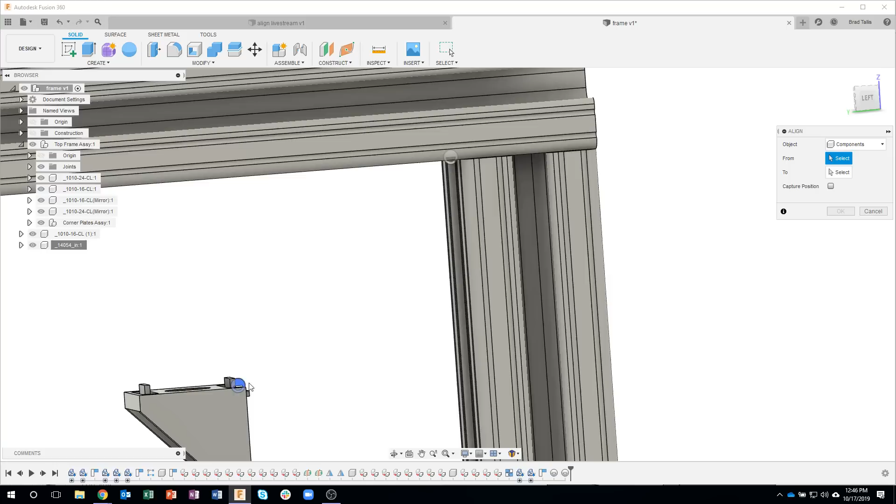What do I want to go from? I want to go a component, let's go from. All I have to do is get near that joint origin, and I'm just going to go ahead and click on it. And where do I want to go to? I want to go to that joint origin. Notice what it did - it's perfectly centered, and it runs along this edge.

Hopefully I can point to it - that edge right there that I can't highlight. So by creating those two joint origins, it allowed us to line those up. You can almost think of it like if I have this origin and an origin like this, we basically lined them up so they match together. If this were like this and we said move this one, it would rotate and try to line up like that. So that's why I spent the time to make sure those smiley faces, or those joint origins, were pointing in the correct direction.

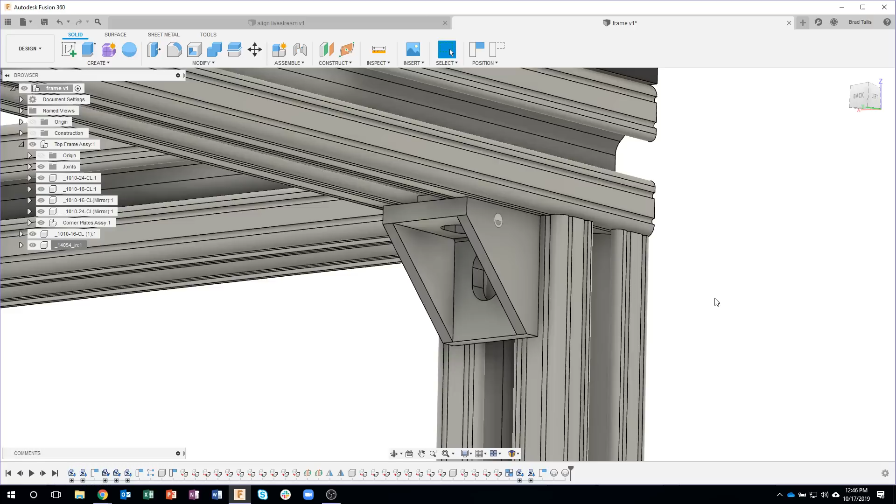Okay, let's continue on here. Now, I could bring this back in, but let's just go ahead and copy this. So I'm going to say copy and paste. I'll go ahead and drag this over, and rotate it around so it's kind of pointing in the right direction - so 90 degrees. Now you'll notice that it copied that joint origin with this part. So I'll go ahead and say okay.

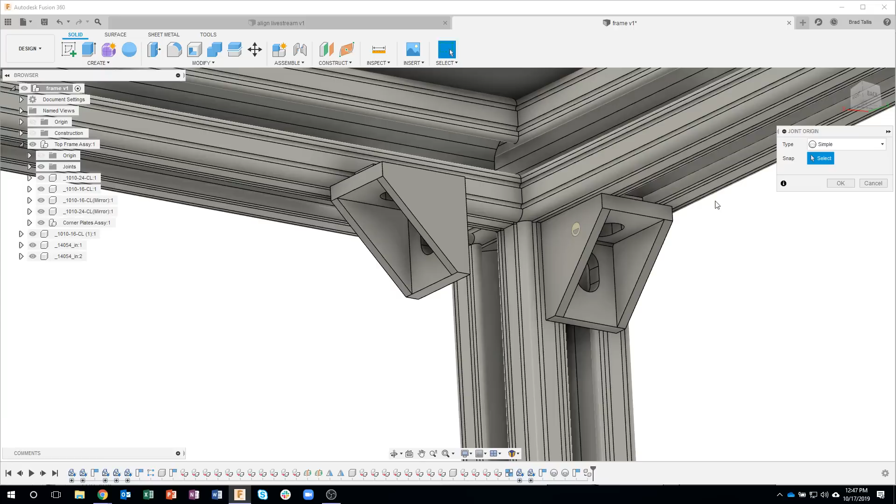I do need to create one more joint origin instead of simple, so I'll say between two faces. I'm going to go a little bit faster since we're running short on time. So I'll click there and there, and grab that little line like so. Looks like the smiley faces are kind of pointing the same direction, so I'll say okay. Sure enough, they are. Now, you could always come in and edit this - you could rotate it around, offset it, do all that kind of stuff. So if it's pointing the wrong direction, you can always go in and edit that.

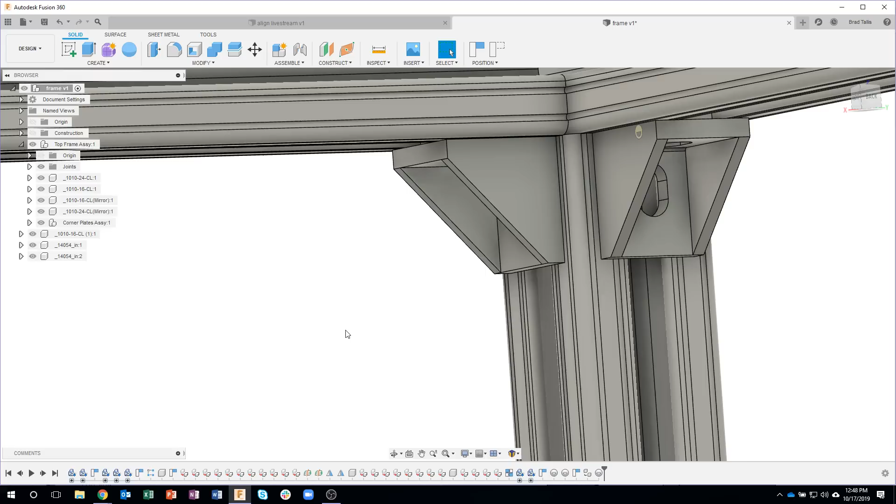Okay, let's align those together. I'll say that joint origin with that joint origin, and boom, it's in the right spot. There we go. Now all I need to do is basically what I did before - I want to copy or mirror these around.

Well, guess what? I already have my mirror construction planes, so let's just do this. I'll come in here and say create a mirror, and I'll say I want those three to mirror around that mirror plane. I'll say okay. Mirror again - I could select them on the screen right here, or I can grab them from the browser, so I can grab all of those parts, mirror plane here. I'll say okay. And now we have these vertical struts.

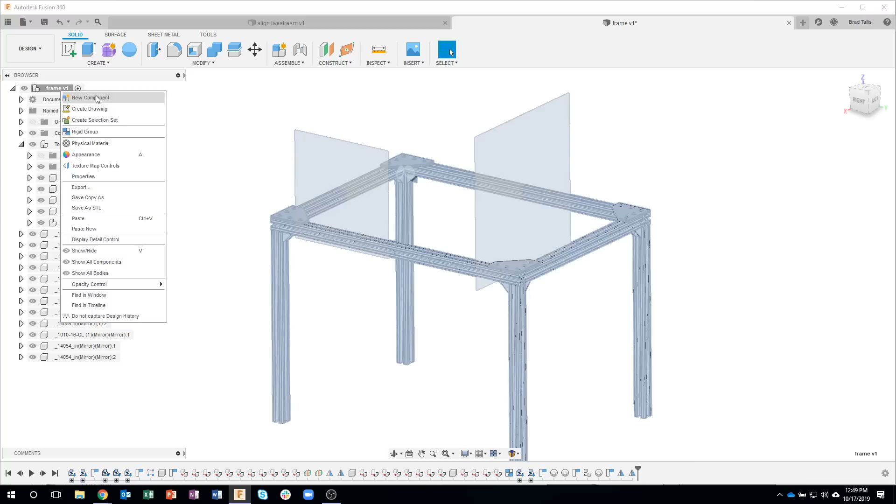Now, again, it's starting to get a little crazy in my browser over here, so let's create a new component. I'll call this vertical strut assembly, and then I can just grab all of these parts and drag that into the vertical strut assembly. So now if I were to fold that down, you can see we've got this top frame assembly, which I can turn on or off, and I've got this vertical strut assembly, which I can turn on or off.

And maybe I want to create - let's just say I want to create a subassembly in here. So new component, and let's just call this corner brackets assembly. Now, here's a neat little trick - I've shown this in a previous live stream.

I've got a lot of parts in here and I want to move certain ones. And I know that the ones I want to move are these underscore 14054, so I want to select those. I'm going to come in here and say select by name. You can see I've already done this, but I'm going to type in underscore 14054, and I'll say find, and notice it went through and found anything that had that 14054 in it, and selected them for me. Now all I have to do is drag and drop - oops, let me say OK first. Drag and drop into my corner brackets assembly, and all of my little angled corner brackets went into this subassembly, because I did a search for that 14054.

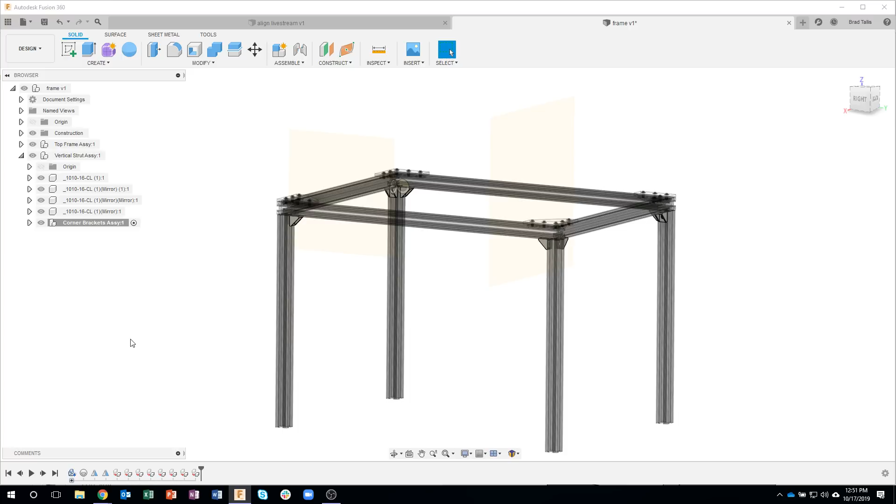Now the last thing I want to do is put this top assembly onto the bottom. I need to create one more construction plane, so I'll say mid plane. Let's grab that guy there, and I can click that top face there. You can see it's slicing through the middle there. I'll go ahead and say OK.

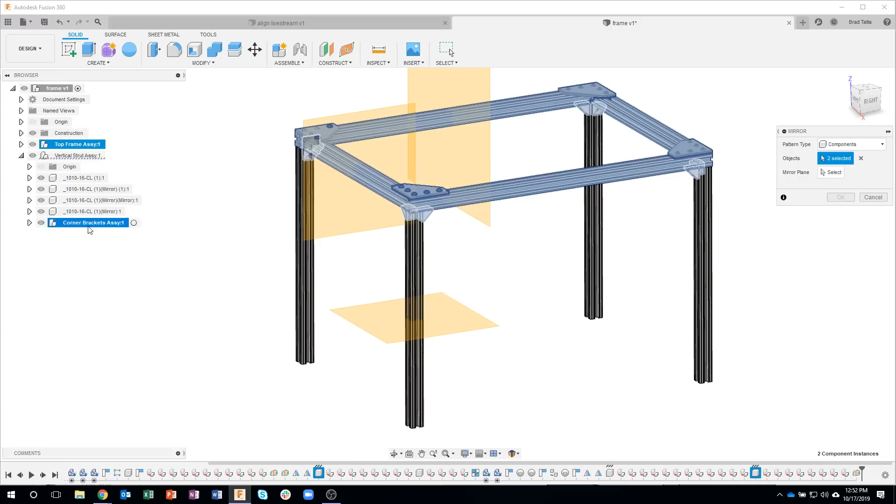Let's create a mirror, components. I'm going to mirror the whole top frame assembly and the corner brackets assembly. So I expanded open my vertical strut assembly and selected this subassembly, mirroring that guy and that guy at the same time. What's my mirror plane? There we go. I'll say OK.

And now we have something that looks like this. So obviously I might want to come in here and rename this to be bottom frame assembly.

And maybe I want to put these corner brackets inside that bottom frame assembly. Actually, I lied, I put them in the wrong spot. I want those to go into the vertical strut. So you can actually see if I highlight my bottom frame assembly, it's highlighting all those angled corner pieces. I want those to be part of my vertical strut assembly.

So I'm just going to come in here and drag that to vertical strut assembly. And now we can see all of those turn on and off. Okay.

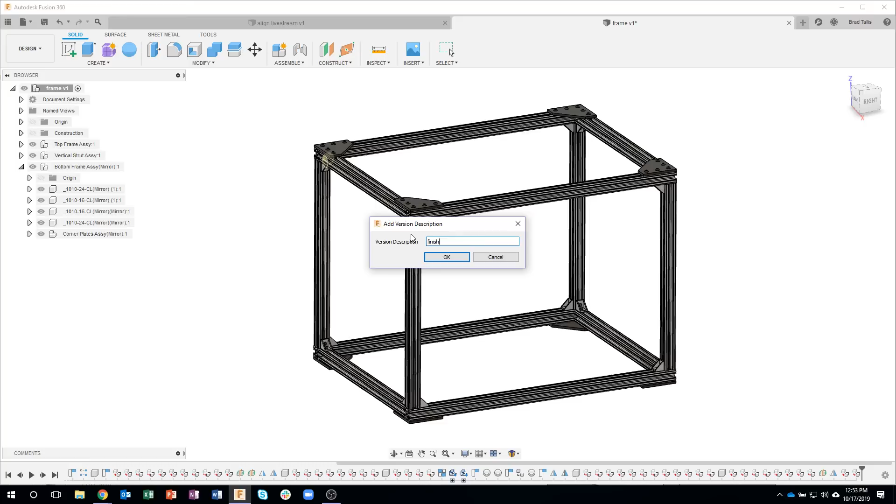Okay, we are almost at the top of the hour. Let me go ahead and turn off my construction. Now here's something kind of neat. I've got my enclosure totally designed. Let's go ahead and save it. I'll say finish. But let's say maybe it's a little bit too tall.

Now, I don't have any parameters or anything like that that drives the size of this, right? Because we inserted particular length 80-20 extrusions. We had 24, and I think these were 16 or something like that. I can't quite remember. But check this out.

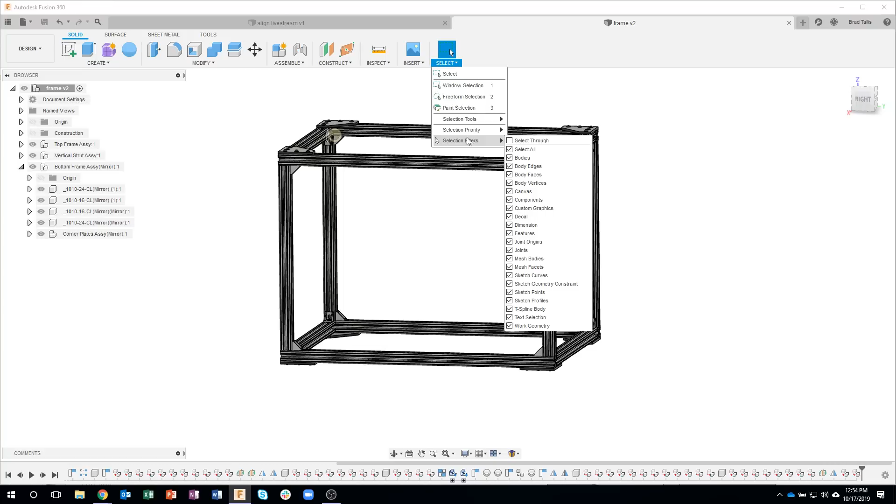I could come in here, look at it kind of from the side, and I'm going to say move. Now this time I do want to make sure I have faces selected. I'm just going to draw a box around the whole bottom of my design here. In fact, I'll go ahead and rotate a little bit. And I want to make sure, sorry, I had too many things selected. Select through, I want to make sure it's turned on.

So I'll come in here and say move, faces. I'm just going to draw a box around everything, and you'll see it'll select all of those parts and faces. And now I can tell it to move.

Now, sometimes I get a weird result when I do this, like parts seem to kind of move out and away. I think that's because of the mirrors and stuff like that that's going on, but don't worry about that right now. I'm going to come in here and say I want to move this 4 inches up. And I'll say OK.

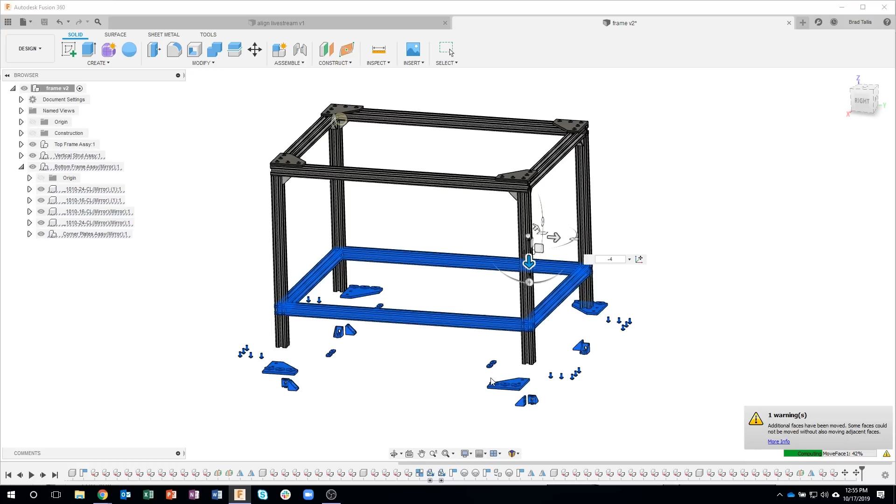And it's doing all the calculation. Basically, it's moving whole parts if it can, and then it's moving the faces also. So I just changed the height of my enclosure by 4 inches, or I shortened it, I should say, by 4 inches.

Okay, I know that was a lot of information, a lot of repetitive stuff, but the key thing here was the align command. I really like it. I use it a lot, especially when I'm doing stuff like this where things are all connected together, bolted together, glued together, like picture frame, for example, whatever. Sometimes I'm helping customers out and I see hundreds of joints, and I show that you can do these rigid groups and have minimal joints. Maybe get the thing together using the align command and then create a rigid joint.

So the key things, I really like this insert manufacturer part, so give that a try. You do have to log in for the first time. I think you have to create an account, you can see I have my login up there, but it's free, doesn't cost anything to do this. Check out all of the different manufacturers that are in here. I mean, I could scroll forever, there is a ton of them in here. So if there's a certain thing you're interested in, see if that company exists out here. If you're doing a lot of electronic design, if you're doing a lot of 80/20 or whatever, give that a try.